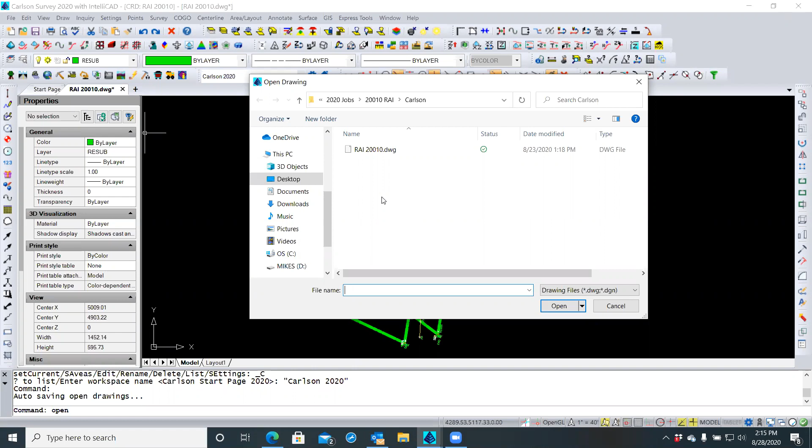Navigate to where that file is, if you recall, or is that what you're saying? You don't remember where it went? Well, I'll tell you what, here's something else to do. Let's cancel that. Let's see if here's another option. If we do file, down here's the recent ones, but you've probably opened more than... oh, there's a temp, is that what it is? That's probably it. Yeah, I think so.

Okay, now what we're going to do is have both of these files open, and see what I'm doing here is clicking at these tabs and switching back and forth. So when we get something done over here that we want to put over here, we can copy it and paste it. Or from the Explorer, maybe we'll have line types that we want to put from this file into the other file. And if you see here, I've got two different files open.

I've got your file here, and there's my drawing template. So let's say if I had... looks like the line types are line type names, and here's the template. All right, so now we've got a few more line types in this template file that you don't have in yours. If we look, at least down from here to here, we're different in the template.

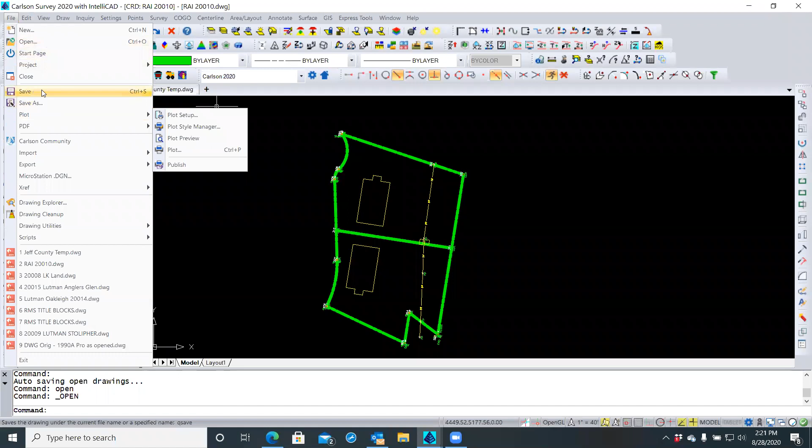Yes, mine does that too. So it's good little insurance.

Okay, so we were here working on this one, if I recall, and there's some layouts, if I look here. Hang on a second, I thought I'd sent you something that we were already putting together notes and stuff on. You did, but that wasn't on this drawing. No, but that's the one I was sort of looking for instead of this Jeff County temp. I can probably find it because I was working with it, practicing. Why don't you see if you can find that and open it? That's the one we're going to start working on as a drawing template. I'm trying to remember now what that was called.

And where would we have put it, is the other thing. Yeah, that's... is that the one we already opened? Yeah.

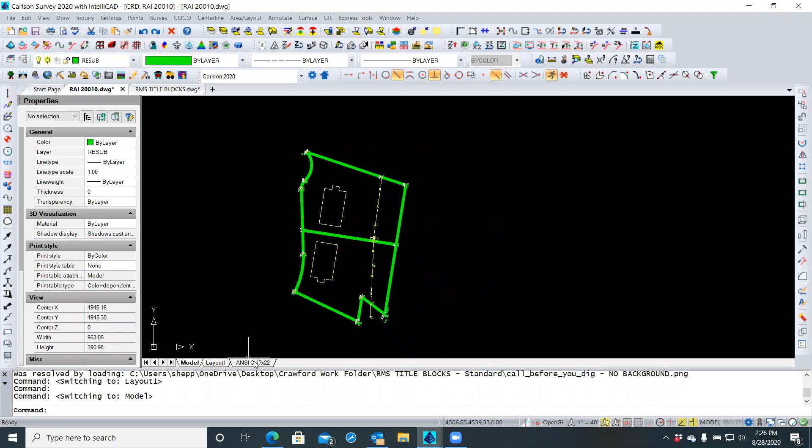Now remember, this is a viewport of a certain scale that looks into our model space, which is here, and does a particular rotation or what have you. So now I'm not sure if this is going to work exactly. I think it will. If I select this guy—because anytime you're in between these different tabs, whether it's model, layout, or ANSI C, or what have you, it's as if you have two different drawing files open, like up to here and back to here.

And there's the CAD command that I'm sure you're familiar with called copy, where when you select something, it asks you to show it a from point and a to point, which means you're making a copy in space right there where you are. So if I said copy, and I'm here, and I said copy this—from the CAD perspective, when I right click and copy, which is one of the ways of doing it, it's going to ask me at the bottom, specify a base point or blah, blah, blah. So I can say, here's what I'm saying: copy from here to here. Okay, so that's what that means.

It's just making a local copy in space of that item, whether it's text or drawing or anything else. But if I want to take it from this layout and put it over in this layout, or vice versa, I need to do a clipboard copy. So as a matter of fact, let's go ahead and start that process.

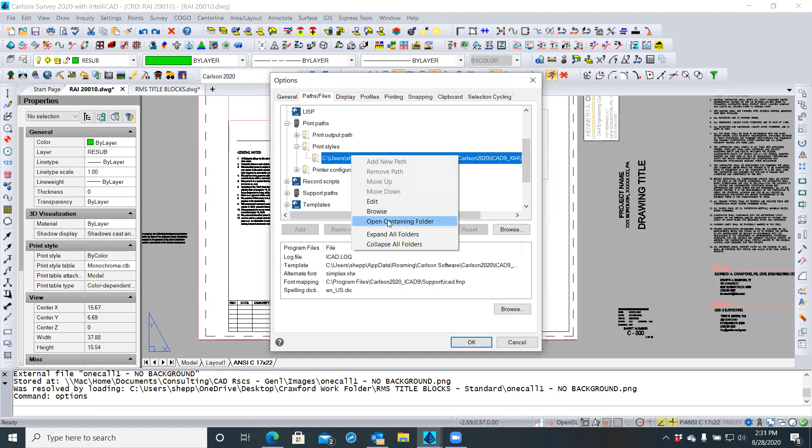Okay, so we've got our Windows File Explorer opened to right where those color tables go. As soon as mine finds it... it's searching, let me just close that. Let's see the form of it. It's going to be my login name under users, under application data. Carlson, until I can... all right, let's see. App data roaming, that's what I'm looking for, okay.

Carlson, 2020, ICAD support, nope, user, nope, let's see support. Carlson. Support. Well, we'll put those in two different places. Sorry Mike, bear with me one more quick second here, I need to run Carlson to figure out where that is on my machine.

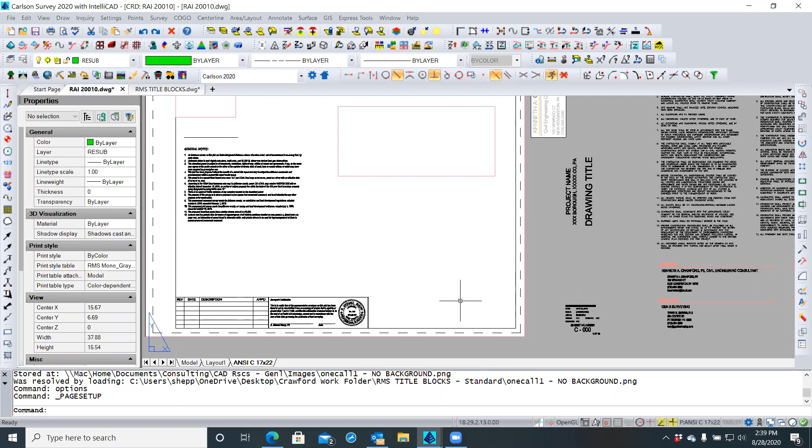There are notes, I see that we've left this guy behind. We generally put him under something like that. And that's the one thing I can't -- even though this is one piece of text, it's one big paragraph of text, when I edit that text, I can't have that line in that text, other than I can have just these letters in that text could be outlined, but it won't outline this other blank space over here. So that's why, and this is pure... it is pure... turn these on, extension, good.

Yeah, you know, it's pure cosmetics and aesthetics, if you will, as to whether to have something like that. But, you know, it just sort of sets it apart and says, hey, here's your notes, blah, blah, blah. All right. Now we have from here, we've got our little location maps.

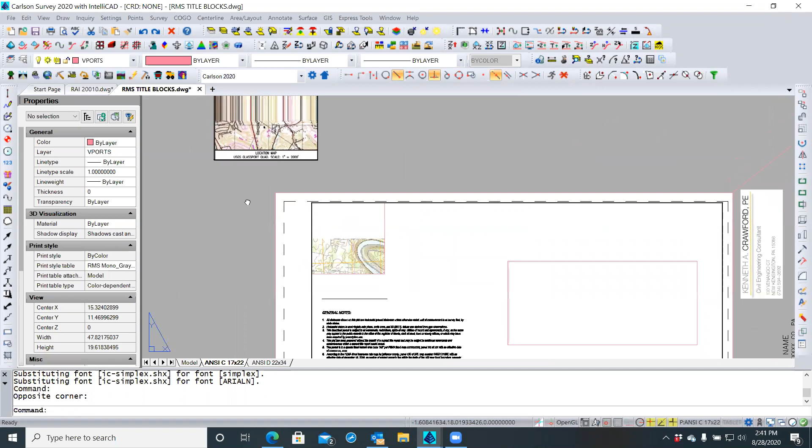I'm not sure, looks like it's in the right place. Yeah, well this is up in New England apparently. Don't know what that one is. It's in Glassport. Okay, so what we were doing was checking out this here, which in our model space... no, yes, okay. That was wherever that is, way down here. That was that mess up there. So this is our probably Jefferson County Quad, it's someplace there anyway. Shepherdstown. All right, okay, it won't -- the subject property won't be in Shepherdstown.

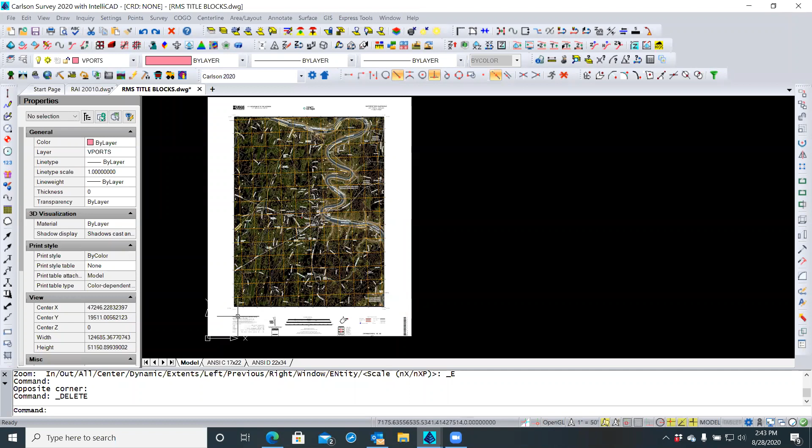All right, so if it's off the edge of the sheet, we don't need to worry about this sheet. So I'm going to take this one out of our file. This is just the template we're working on. I'm going to delete this just to get rid of some of that excess.

Which we'll put over here, showing nothing. So we're going to come back to this.

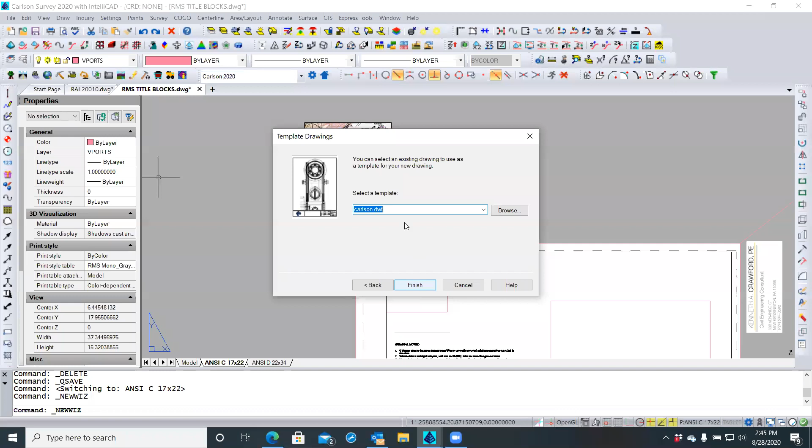What I would like to start to do as well is make yet another file. So I'm going to say a new file, click that icon there. This is a new file in Carlson, correct. Okay, let me cancel this. Yeah, no, that's fine. I'll just make a new file and say a very bare minimum template that I've got, and I'm coming into here to create this file.

And for now, we're going to go back to that Crawford work folder as we're putting this together. I don't see anything, let's come down here. No, it won't be on the Z drive, that's a thumb drive. Oh yeah, okay, if you click on it, it's right there above. There it is, and 2020. Yeah, okay, there it should be there. Where is this? It was on the desktop. Thank you, ah, there it is, your Crawford work folder. Yep.

All right, so while we're creating this drawing, I'm going to call this one our vicinity mapping, and we're going to make just a file that's going to hold the maps we'll use for our vicinity mapping, that we can use from job to job to job. Okay, so I'm going to say save.

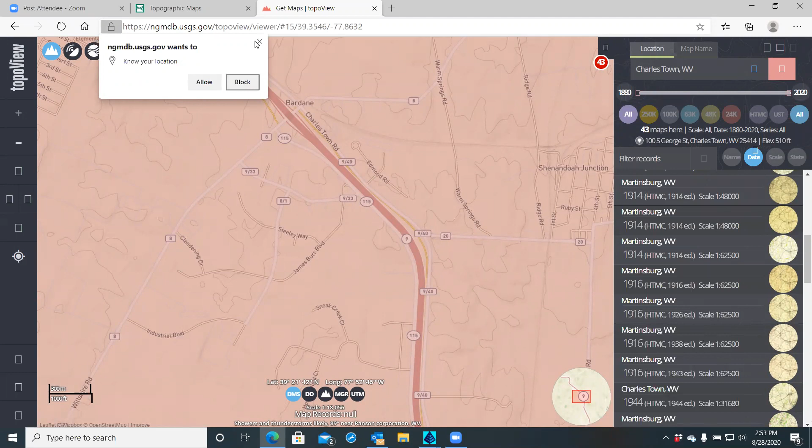Let's see what we put here. I don't need that location. Let's see, back initial extent - right, those are just navigation tools. I don't need that.

All I need is, I want to download it. So about, comment, share - that's where we're looking.

Oh, I see over here all the different historicals - so 1891 Harper's Ferry all the way up through 2019 Charles Town. Yeah, it went back to Harper's Ferry when Harper's Ferry was still in Virginia. That's pretty cool. All right, so there's our Charles Town, West Virginia 2019, so we selected that one.

We save as - these are just web pages, nope.

All right, so what I want is that map. All right, so scroll to, okay, show info, zoom, pan, pin this map, reporting errors, show - oh, here's my choices: JPEG, KMZ, GeoTIFF, or GeoPDF.

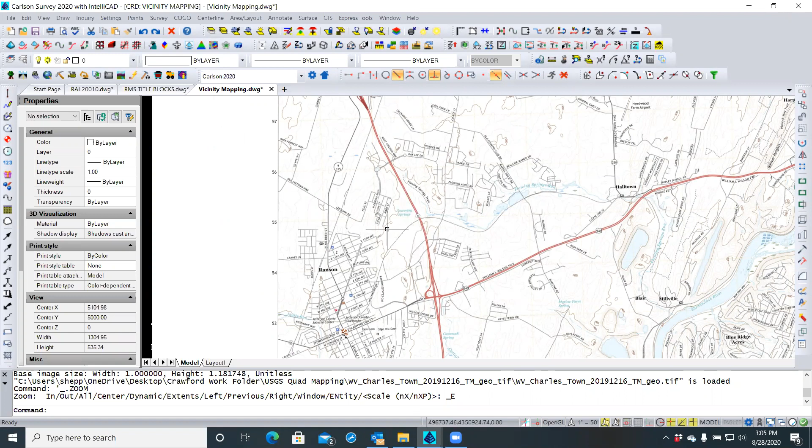Now, none of that is necessary with what we're doing over here, because I think we're still in 5,000 space, are we not? Yeah, so none of that's necessary, but we'll just have to move it around a little bit to make it fit.

I think, let's see, do I have that over there? I still need it. Okay, yeah, to make it fit up here, we'll just reposition it, all right? So let's go to my vicinity mapping. So there is our one file that's in there.

Now we could... I need to find something now because I told it no conversion. Aha, this is in meters. It's in universal transverse Mercator. That's meters, maybe it's in meters. Hold on.

We may have some adjustment to have to do here, Mike. Let me see. Let's check out this distance. If I go from here at 0 to here, that distance should be roughly 10,000, and it's not, it's 3,000. So it thinks it's in meters.

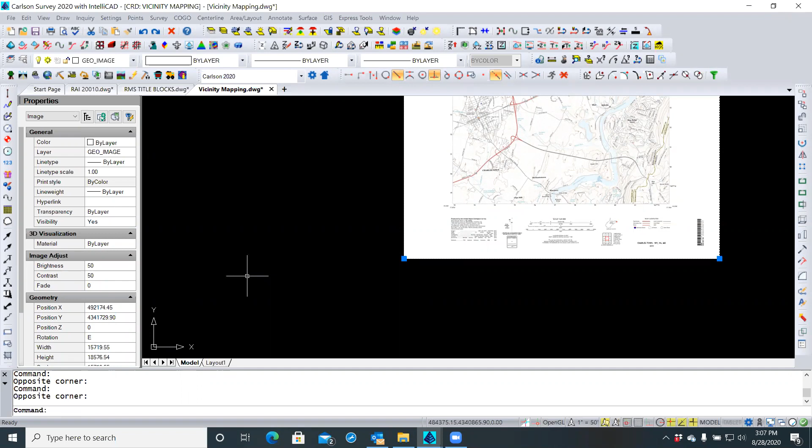Okay, so I'm going to actually select that, delete it, and repeat that process. Place image by world file. I'll select that file again. And now the unit system.

I think it's asking for my originating coordinates and not my destination. We'll see. Let's see what size it comes in as this time. Let's give it something rough. Yep, that's it.

So your state plane coordinates around the Charlestown area should be on the order of, if I'm looking at that coordinate box down below, 1,630,000 as an easting, and 14,260,000 as a northing. Does that make any sense to you? No.

That's what I was afraid of. All right, so it brings it in the right size when I do it that way. So there's our scale. Are these what you would expect to see as state plane coordinates in your area? Yeah, in feet, right? Mm-hmm.

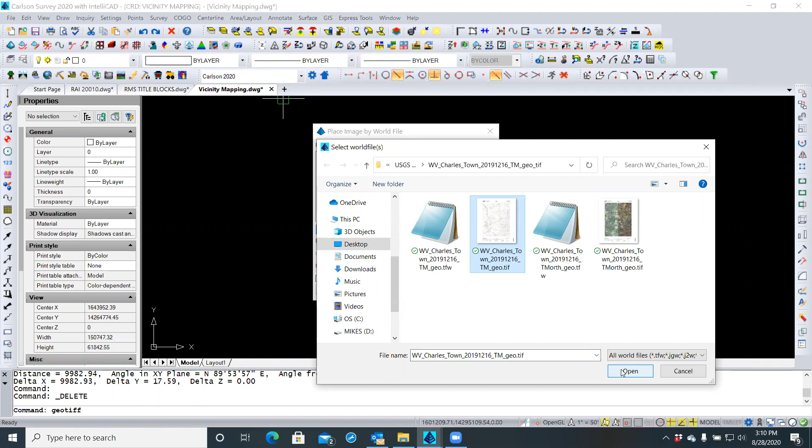Well, I'm not really sure why this isn't going that way. Pause to insert. If I take this file, I think I have to take that file and try that and see.

Set the unit system for the image world file. That should be meters. That screws that up. I think it's the right distance. All right, that gives me the right coordinate range.

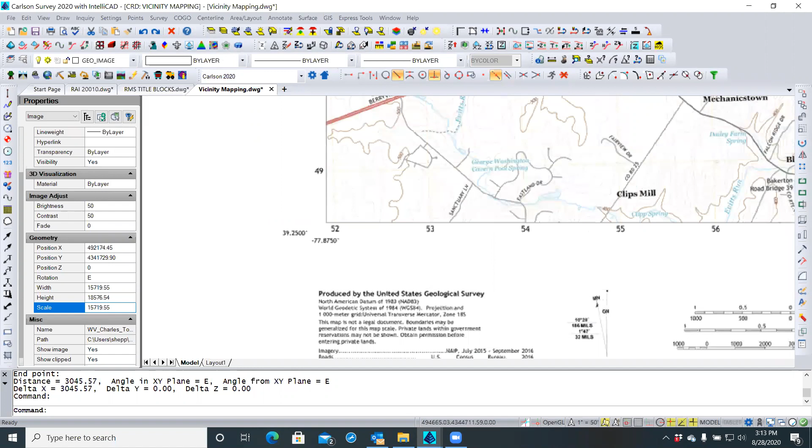So we'll do, anything, 242,000. See, it's very definitely, when I bring this in, I tell it that coordinate of that lower left pixel. But if I say US survey feet or no conversion, if I say US survey feet, it takes this coordinate value as if it were a meter and multiplies it by 3.28 or whatever that number is and puts it way up there.

So it brings the distances incorrect. Now see, if you look at this, if I measure this in meters, if I say give me a distance, I'm going to go from here to, let's go all the way out to here, and you should see that number is going to be close to 2,000. Look down here, see, that's 2,000. I didn't snap on it, I just clicked from here to here. It's 2,000, but that's 2,000 meters.

Okay, I wanted to be able to measure 0 to 10,000 in feet. So if I go from here to here, that should read roughly 10,000, but it doesn't. It reads as if I'm in meters in my drawing.

So my point of confusion here, Michael, is that this process, what we've just told it, should bring that in correctly, but apparently...

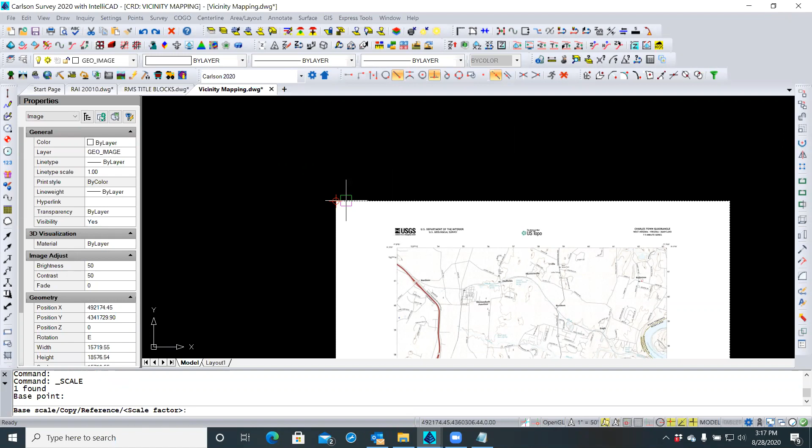So in US survey feet units, I've got 39.37 inches per meter. So that's 39.37, divide that by 12, so that's 3.28083333. That's my scale factor, 3.2808333333, and boom. All right, so now I'm at the right location coordinate-wise.

In fact, are you familiar with a state plane coordinate value roughly in, say, Ranson?

Not off the top of my head. I was just hovering the coordinates, looking around. I'm at like 500,000 easting and 4.3 million northing. Does that sound relatively in the ballpark? Okay, so I'll check one last time on the distance. Pretty confident it's going to be correct. I'll go from here to here, should be close to 10,000. Bing, bing, boom, 99, okay, that's it.

All right, so we're okay here. I'm not going to worry about saving, giving you a process on this thing right now to try to memorize, and we'll start building this, but I'm going to leave this here. I will, however, in the coming days try to figure out or get with tech support and ask them what's going on with that. So I'm going to save this file, called vicinity mapping, and we're going to use that to reference into our drawing.

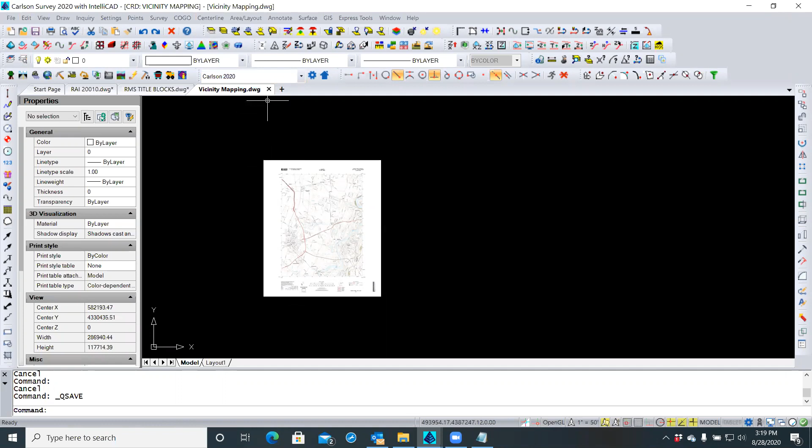So I'm just going to close it for now, and we're going to reference it into this file. Let's see how I want to do this. I could bring it straight into paper space, or bring it into model space. I'm at the title block. I want to be in, well, it won't matter in this file because it's not going to line up with our stuff anyway. So let's go to model space, and I need to X-reference, externally reference, that mapping file so I can show it from my layout.

And what I'm going to do is, when you X-reference anything, it's going to come in on the current layer. Well, right now my layer is called resub, so I don't want to see that show up on this layer. So I'm going to go to my layer manager, my layer control button here on layers. I'm going to make a new one and call it XREF.

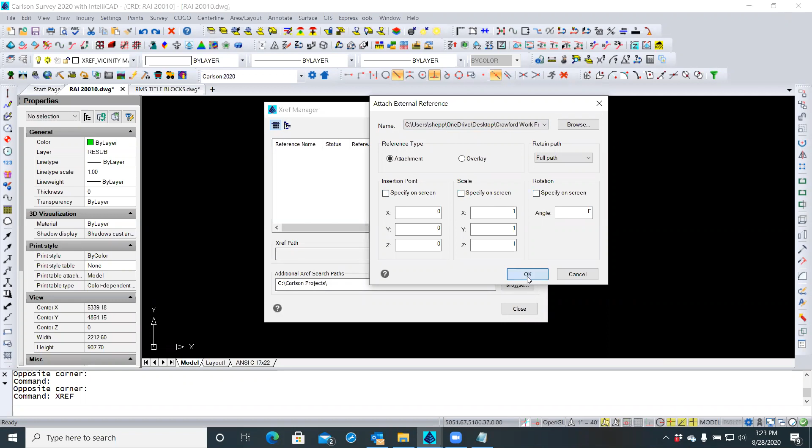Sometimes you have to navigate to it depending on where it's pointing. So it's going to be here, I'm going to say open. Now, when it comes in, it gives me the opportunity to place it at a specific location, give it a different scale and different rotation, but I'm going to uncheck all of those so that it does come in at the proper coordinate location. And I'll say okay. Then it comes back up and lets me do some more stuff with other files. I'm finished, so I'm going to say close. And now I'm going to double click the wheel and do a zoom extent.

So you can see where your work is down here at 5,000, 5,000. We'll come up here, see the coordinate values. There's your 500,000, comma 4.3 million, and there's going to be our area up in here. So this one is truly at a state plane up here, however, down below it's not. That's your 5,000, and that's okay. So we're going to use this though to build that map.

Now I'm going to do this just because I don't like to see this extend control. Let me see, X fade, XREF fade control. It's usually really high, and if I say 0, you should see that, that's fade control.

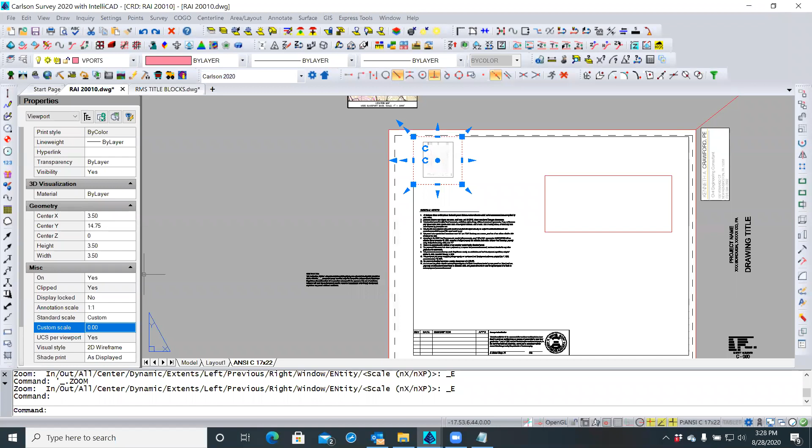Oh shoot, it's 24,000 inverted, so that's going to be 0.0000416666667, 4166667. No, that's not exactly right, is it?

No, it's not. It is—should be 1 to 2... 1 inch equals 2,000 feet. The paper's already in inches, so that should be 2,000 inverted, so that's 0.3 zeros and a 5. So this...

Let's see, am I in paper space? Come on, paper—there we go. All right, so if I'm here, that standard scale now is not going to be available. We'll just use custom, and a 0.3 zeros and a 5.

Come on... regen everything, let's see. Mike, I don't understand what's not getting fixed here. Did that... it's not changing size there at all, is it? Doesn't look like it.

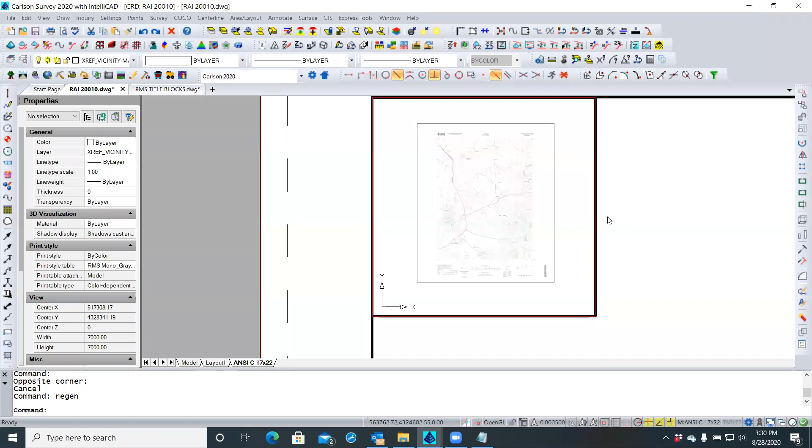I was just wondering if there's a delay on the visuals coming back to me. Guys, do you still see the entire frame inside of this? Yeah, it's kind of blurry, but until you zoom in, it'll straighten itself out.

Oops, that's a little too tight. Ah, it finally regenerated itself at the right scale—maybe, except now I've got to go back and find it. I think what happened was I was inside it. So if I'm here at...

Let's see if I can write this way. All right, so that's at the right scale. That is at quad scale—that's as if you had taken that quadrangle map.

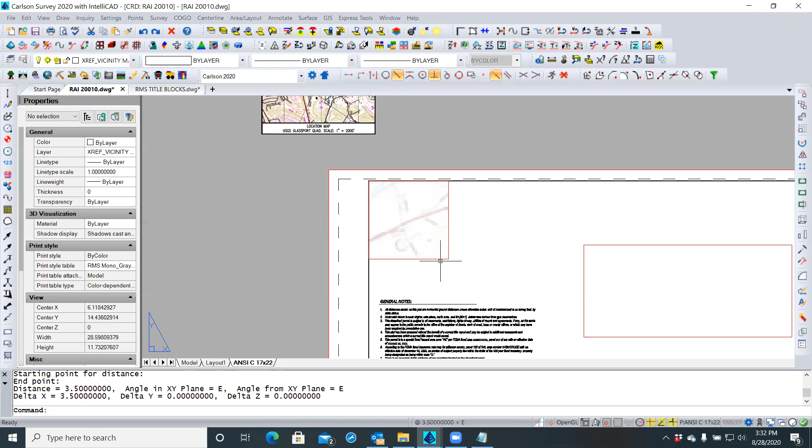Now keep in mind, the thing we're looking into here, this viewport, is only—what is that, distance from here to here—3.5 inches. So it's 3.5 inches square out off of a quad sheet, which is here. So it's only that little 3.5 inch window that we're looking at.

Now we can change that if it needs to be bigger, or what we need to do at this point, if that's sufficiently large—which it should be if you've got enough features shown—we need to now position what we're looking at dead center of our project site. And that's where you're going to have to know where that is.

Yep, so first of all, what I want to do is hit the save button. And there's the regeneration. All right, so now what I want you to do—I'm going to double click inside of it here. So now it's active, but don't roll the wheel, okay?

Okay, that'll change your scale, but we do need to pan. The way you normally pan is you press and hold the wheel, but it's awfully easy to roll the wheel accidentally. So if you type the word pan and hit enter, you can use the left mouse button instead. Use that and get it centered around your job site.

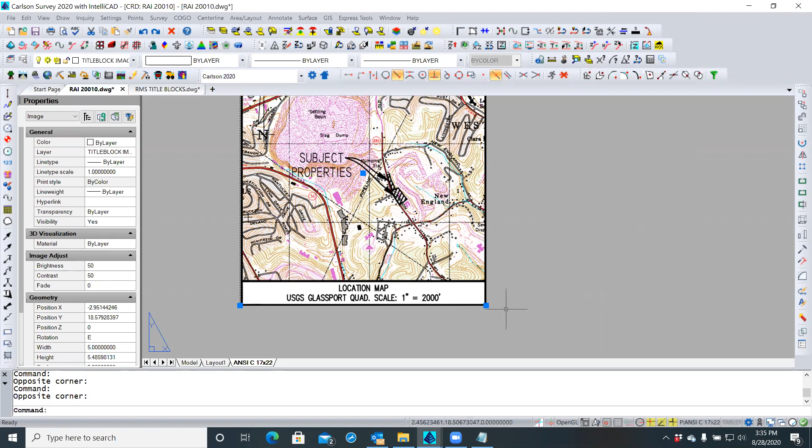What all is that? Is that all? Is that part of the... that whole thing is an image.

So I don't need this anymore, since I did that in a separate software. But I might like to have some kind of a little title, a little caption, something that says it's a vicinity map or a location map. So let's do that here.

We're going to find out what layer this is on. It's on title block notes. I'm going to make that my current layer, select it, and come to this secret little button right there. This is MOLC, which means make objects layer current. So when I click that, you see I've changed to title block notes.

And I'm going to put the little title, scale reference, and maybe a little north arrow onto our location map. So now what do we want to call this? What do you guys typically call them? Vicinity map, area map, location map? Vicinity map. All right, so we'll call it that.

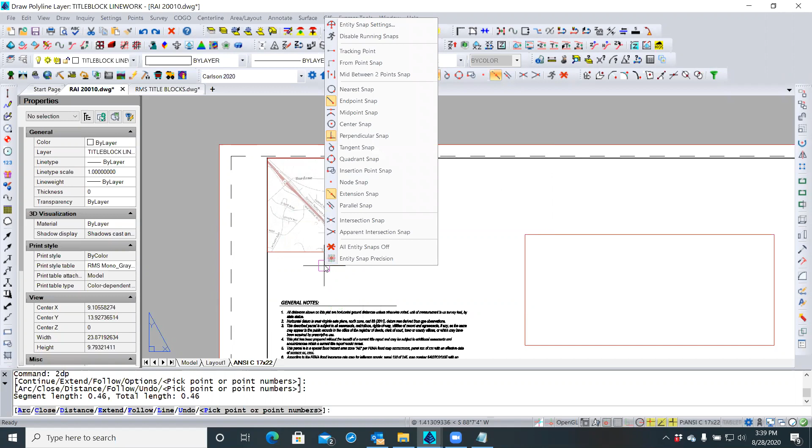I don't need to be much more than that. And then I'm going to draw over here, and I'm going to snap perpendicularly to that. And so that gives me a little area to put some captions.

All right, so I'm going to zoom in. Now you're going to switch your current layer from title block line work to title block notes so that we can put the titles on here. There you go.

And you're going to type this: vicinity map, maybe the name of the quad if that's what you want, or you may not need to do that, and just call it vicinity map, or give it a scale. Is that where I go? The type? Yep.

And survey text? No, not really - that has to do with measurements of the ground. So in fact, the annotate menu itself is maybe not the best one here, because we're really just going to put some text down. Annotation in this sense means to annotate the geometry in the model, like the distances and bearings they've drawn. So we're really just labeling. So we're going to go to our draw menu instead - so I misled you.

I apologize. There you go. Yes, and we're going to just do a standard text would be fine. Any number of those things.

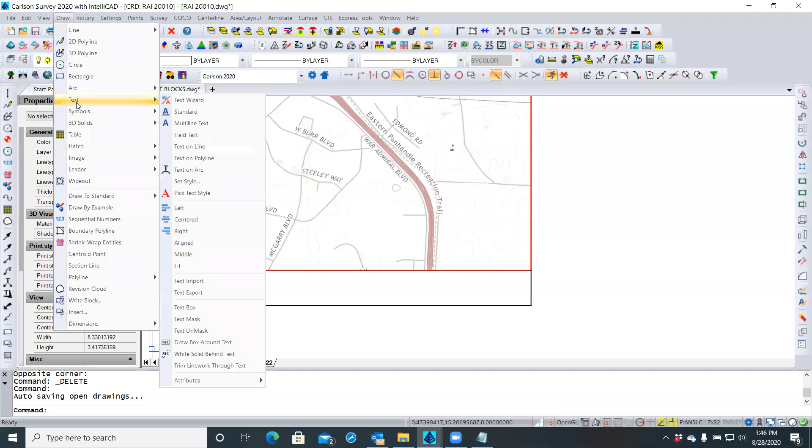We'll go ahead and do this, just to show you how that's done. So if you want to center that and you want them one line above the other, then if you go to draw text, just like you did before, just standard text. Now you're going to click a point or justify or style. So the first thing let's do is J for justify.

And the justification we want, here's your different options. Left is what we just had. Center would be what you think we're going to use, which could work. But notice those ones with the 2-letter codes: TL, TC, TR means top left, top center, top right, middle left, middle center, middle right, or bottom left, bottom center, bottom right.

So if we type MC, that means the middle of the text and the center of the text, that's its insertion point. I'll show you what we're going to do with that in just a second. All right, so we now have that, and it wants you to know where do you want that to be.

Well, now remember, right now your entity snapping is off, but we are going to put that somewhere, and if you have something you want to line it up with, you can snap to that point automatically, and we're going to do that right now. And if you see up here...

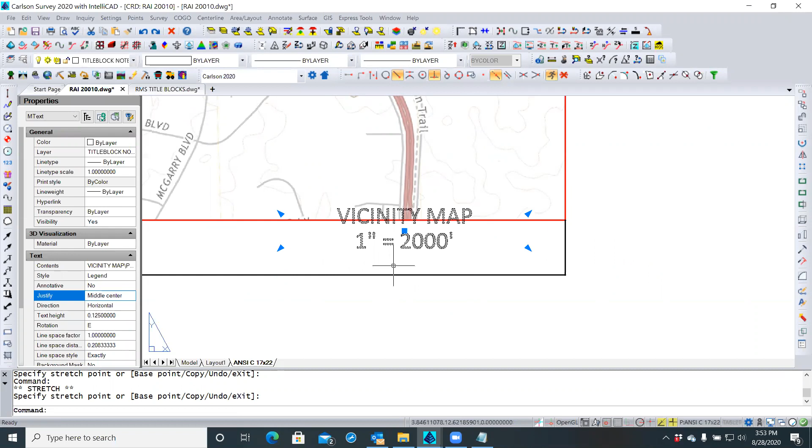So now I need to move this text. It's selected now, and I'm going to right click and choose move. It wants to know from and then to. Well, the from point is my insertion point of this text, which is now the middle center. So I'll shift click.

Insertion point, and I'll grab that piece right there, the insertion point of that text. So that's now where I'm going to line up. And you remember the one we did a minute ago? Hint, hint, this guy right here.

Yeah, so we'll go middle of the 2 points, and the 2 points I want to go in the middle of are shift click mid, which is right there, and shift click mid of this one. And if I look at that insertion point, it is right between these two guys.

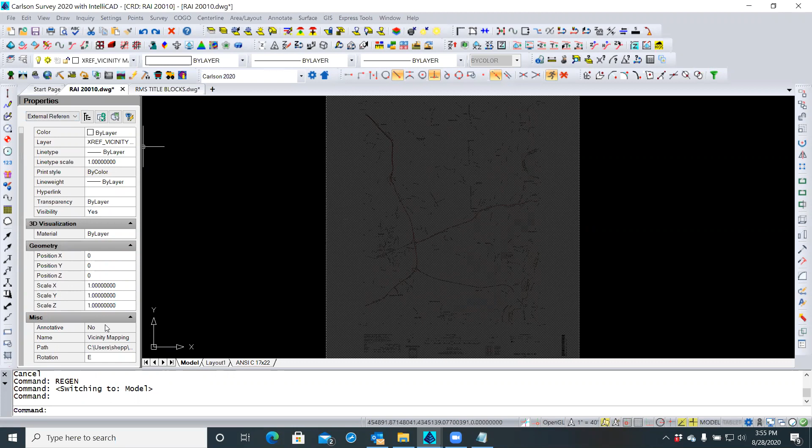So that's the essence of getting that done, and you can use that same file. Remember, the file that I have in here is an XREF, an external reference, and down here it tells me the name of it. If I scroll down, it's called vicinity mapping, and it lives there in that folder I've got.

So that can always be done. And usually, if you're working in state plane coordinates and you bring that file in, it's going to line up right underneath where you're working. Okay, but this will work for what we're doing.

Keep in mind, though, if you ever do a zoom extents while you're in model space, it's going to try to figure out that the extents includes where that mapping file is, which is way off up there in different coordinate space. So one of the things I like to do in that regard is this is my sort of working extents, if you will.

And I'm going to type, or you're going to type, the command view, V-I-E-W, and hit enter, and you're going to save this. The way you save it is you're going to click the new button right there below, and up here in the name box at the top.

Over to the right where it says name, highlight that and just call that, you know, main site or whatever you want to call it, or project area, just anything you want to call it. And you'll type site location. That's fine. Now say OK.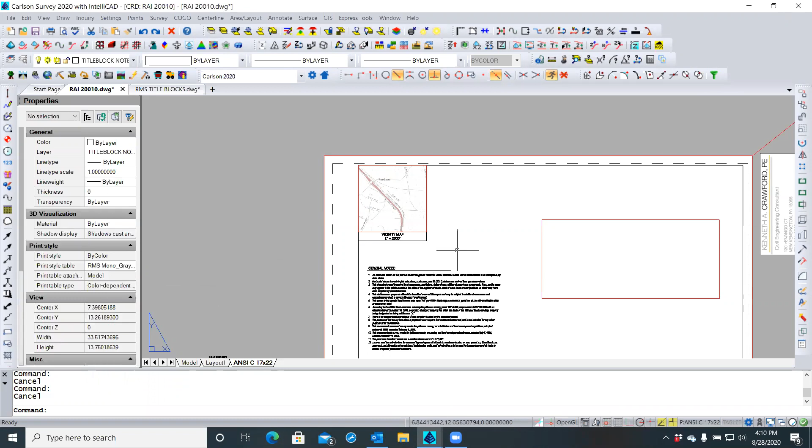All right, so now, first thing we're going to do, we'll worry about these notes here in a little bit. I'm going to drag them out of the way for a minute. We'll select both the notes and that line. I just did a crossing window to drag across it. Now I'm going to press and hold the mouse on either one of those and just drag it off to the side here a little bit. That's a shortcut way of doing a move.

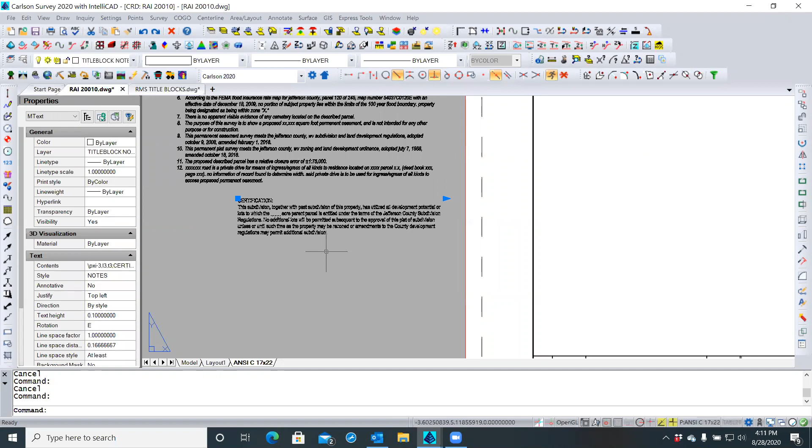And we don't need this certification. I think we already worked on this last time. This certified the monumentation showing this plat. Well, actually, that certification is a different certification. We don't need that one for this, but we'll need it for some others. We still have it over here in the one that we're working on. That's here, we're going to always have it there. So for right now, we're going to be getting this guy ready, so I'm going to select him and delete. All right, so we have that.

So we need to get our drawing in at the scale we want, and then we'll arrange all this other stuff around it. If we go back to our model space, that's what we want. We started looking at, here's layout 1. This was that layout, we sized it, we rotated our view. We did not rotate the stuff in it, we just did the view, if you remember. One thing we're going to have to do is show the other side of that road right of way in front. That's no problem, we can either make the viewport slightly bigger, or we can reposition this. Any of those things is fine, and we'll come to that in a second.

So the last thing we did last week was, on the view menu, we did this twist screen, and we lined up with that line across the front to be horizontal on our sheet of paper. Okay, and now what happens if I double click inside it, you see that little icon there? So north is sort of that way. Right, and that's going to be what we use in just a minute. So I'm going to double click back out of it. If I select that viewport, I see it's on layer 0. I'll put it on layer V-ports so that it doesn't plot the frame.

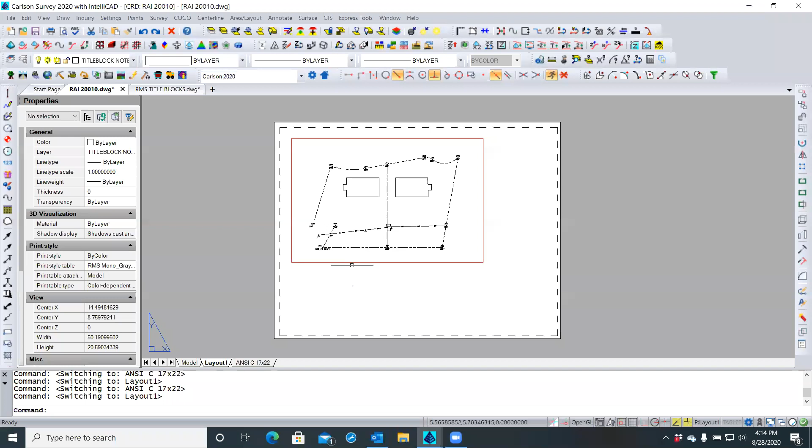Okay, now to bring the viewport from here to here, we're going to do a copy, but because we're changing these tabs, it's just like we're working in two different drawings. We need to copy this through the clipboard, because remember, the copy in a CAD sense means to give it a starting point and an ending point. We're just making it a local.

So we're going to select the viewport. We don't have to select anything in it because remember, it's just the frame, the hole we cut into the model. That's what we want to copy.

And I'm going to let you drive here. So you're going to right click, and you see, clipboard, and you're going to copy with a base point.

Go ahead. And now I would pick, it doesn't matter where, maybe that upper left corner. So, yeah, that's fine. And all right, so it's now copied.

You can press escape to deselect it. You don't even have to. You could leave it selected. Now I would get in the habit...

We're done working with our... shoot, what happened here? Well, I don't know. Put that back to full size screen. Something I double clicked it.

I like to put my snaps back on, and back when we were working with the text, we turned them off. But this way, if I need the snaps, they're on. That'll come through practice and habit.

Now, so you've copied this, and your reference point is that upper left corner. So now let's go to our drawing sheet, which was that one, and let's right click and choose clipboard.

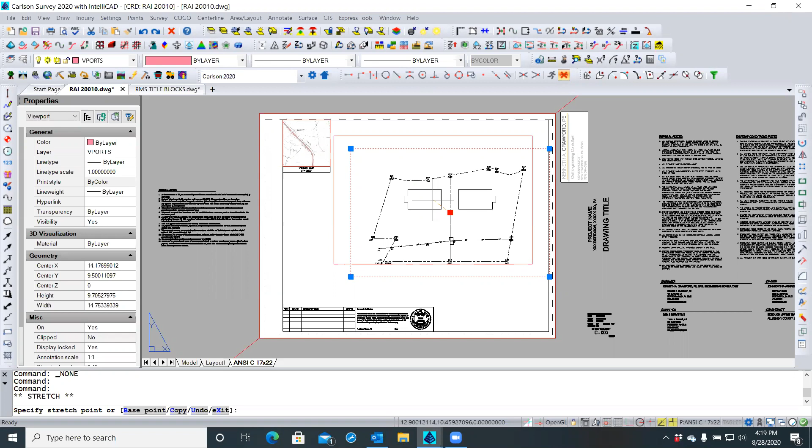Now get in the habit of seeing that the edge of that viewport is getting close to the edge of the vicinity map viewport. Get in the habit of understanding that it doesn't matter if they cross. What you want to do is go ahead and click to let it go.

Now, what you want to get in the habit of looking at, Mike, is getting a sense of where this line is going to be in relation to things, because this stuff is just defining the limits of it. We're going to be worried about where the actual line work goes, so you don't have to move this by this point. That just gives you a point of reference.

You could highlight it, right click, move. And this time, instead of it being in the middle of there, we want to take it from, say, right off that corner, and put it right there. Okay, so you see how they overlap, and none of that matters.

In fact, these viewports can have—now not this particular one, this is a rectangular viewport—but you can draw irregularly shaped things. Let's say I drew something that looked like this, and I could turn that into a viewport. So that would then be a viewport instead of this red one. But right now, rectangles are fine.

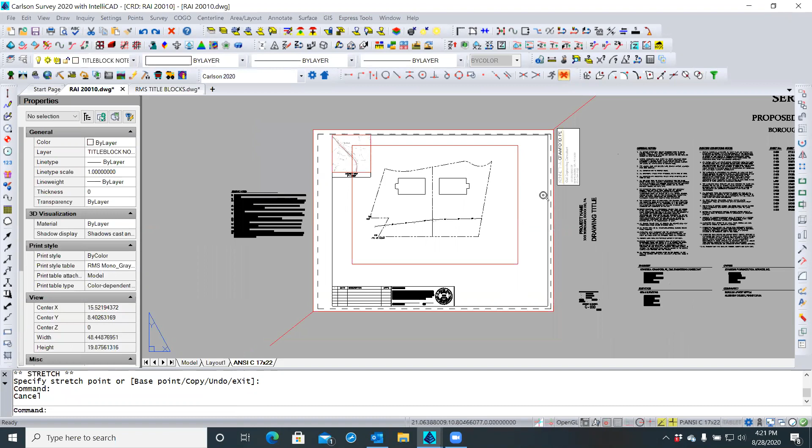Yeah, I'm wondering if we're going to have room for all of those notes. Well, we may not. Keep in mind, all of these notes would barely fit on the sheet to begin with, but these are construction type notes, so they may not apply. So as we're working on this, you need to figure out what you need in your general notes.

There are things here like horizontal datum is West Virginia. I don't know, this came out of something, but it obviously needs some edits. And it should be state plane, not state—it's a state plane. But I don't want to...

I don't want to spend a bunch of our time together here to do this stuff. This stuff you can figure out. So read through your notes and figure out what you want.

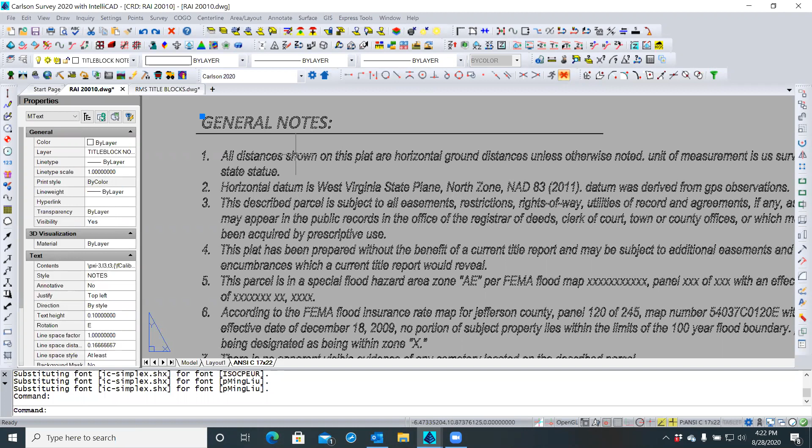Now, this style—you may not want it to be italic, so maybe this style would be... let's see if I start here and go to the end. I'm going to change that. There's no style. Say okay, except no, that's probably... well, that's what I want to do. Yeah, there we go. And I need to come up here and just select that title and make just that part of it italic, and say okay.

Go through your notes when you get a chance, figure out what you want, even if you just type it up as part of a word processing document. Figure out what needs to go on there, and if we're not going to use it, we don't worry about it, we're not going to care. If this is our single sheet, we may or may not even need a legend.

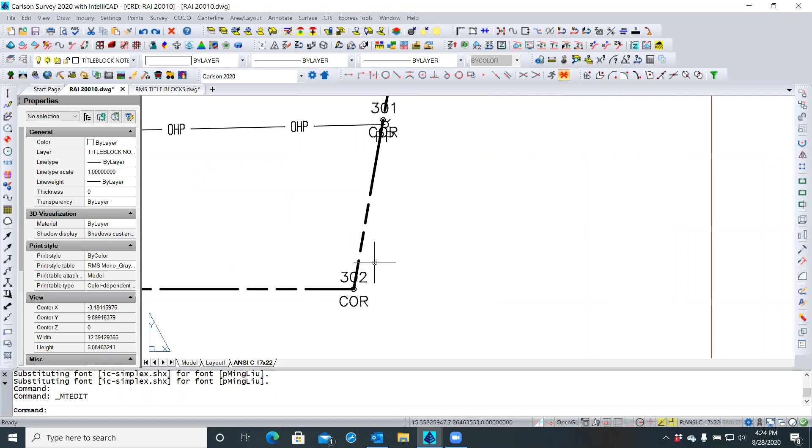The only reason we would need one is if on multiple pages we have different things, but if every time we use a symbol, or the first time we use a symbol, we then give it an explanation, and say a call out or whatever.

Oh, and by the way, too, I don't know your preference—if you like to see these things look like that. I'm going to zoom in here a second. Let me see if I can fix that. So I'm at that point. I'm going to go to the symbol, and instead of this, that's SPT2.

I don't know that they give you these. You may need to download them. Let me see.

SPT2. Look up here for a second. Points with wipeout, yeah okay. So that's points, right? If we choose points with wipeout, then that SPT2, I don't see a 2, I see a 4. That'll be fine, it'll be slightly larger. So I'll take that one and say okay.

And now I'll click back to paper space. Click that back on. Oops. Endpoint, center, extension. All right.

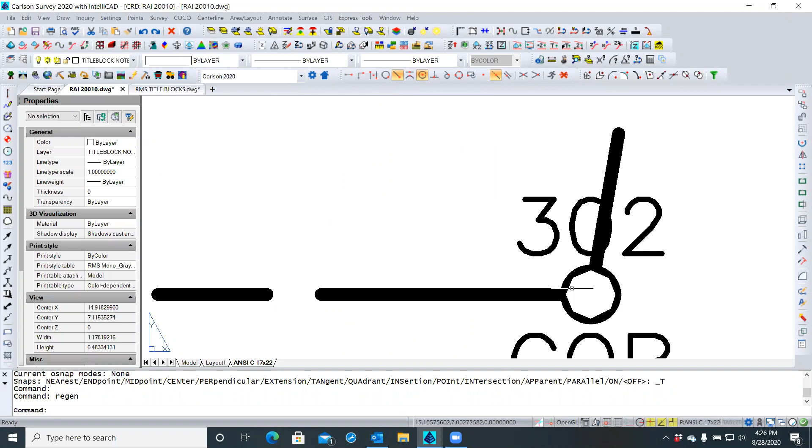So now you see the difference there. Yeah, it's sort of obvious, and it looks like I've trimmed this line up against that edge. Now, yeah, it looks much better. No, I don't think it's going to look like a stop sign inside of there. It's going to be, when it prints, it'll look like a circle. Right.

So consider doing that, and when you find that on those points, I change that one. It's that symbol, instead of points, it's points wipeout. Now they've got SPT4W, and I don't see, that's what I was looking for. Yeah, that's just a few of them that they have. They don't have the whole points library done over again. Okay, so, oops, what the heck, I thought I was doing it, set points wipeout 4W.

Now, what that is and why it's called that is that when you break this symbol apart and figure out what it is, that circle just like this is, but it also has included with it what's called a wipeout. And a wipeout is where you draw a frame, you draw a shape of something, and if you say wipeout with it, then what it does is it fills that shape you've drawn with the color that's the same as the background, either the background of the screen over here, which is black, or the background of the paper in this situation.

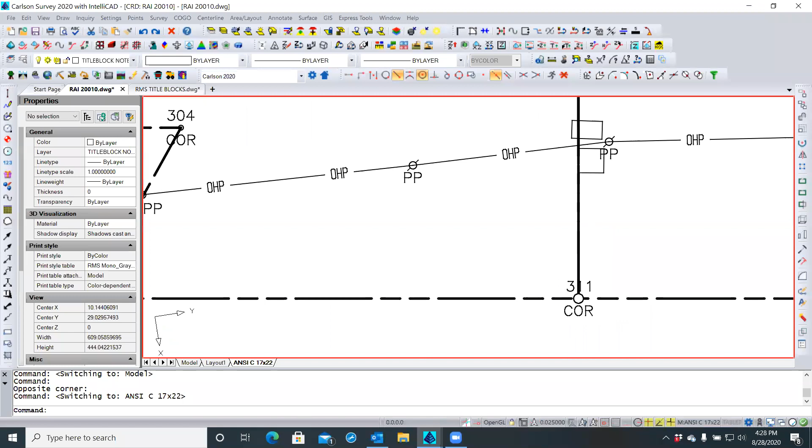Okay, so it just basically blocks out, it wipes out everything except, and it is something that you can select and get rid of, or select and put above or below certain other things in the drawing. Okay, just like send to back, bring to front. So it's really a nice little thing. And I think this, for instance, this power pole,

now go to my wipeouts here, and there is maybe, yeah, there it is. Okay, so you can see the difference. You see how it looks like the line just, yeah. So that's something, but the nice thing about that is that you're not having to trim the lines here.

So when I select this, it still goes to that corner. It comes out of the corner, so I can still compute. It's still a closed polyline, all of that. It's just that it sits below that wipeout. And if for whatever reason, sometime you're ever working with these things and it starts to look like

that, you say, oh, what happened? I fixed it. Well, what's happened is that, that is still there, it just sits underneath this one. So this one needs to go back to be underneath that wipeout, okay? So just understand that's sort of a vertical hierarchy there.

All right, so I'm going to let you fix all those. Click outside of that, and you say we need to... it's running through Zoom, it's dropping some video here and there. It just did a regen, brought it back.

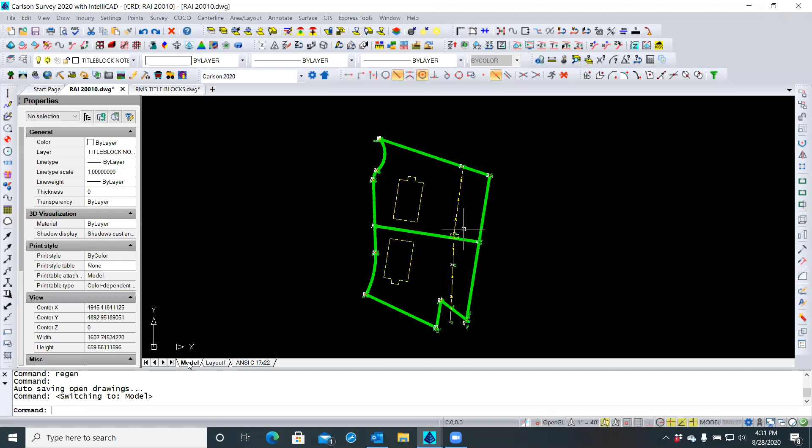Now, obviously, you're drawing it in inches instead of feet, but what you need to do is you would be over here, and you would draw it here. Right. And in fact, what I would do, is that a constant right-of-way width? Yeah, 60 feet. But now, and then obviously this is different, I guess it'll be 30 feet to the center of that cul-de-sac bulb.

So you could draw the line, you could offset it 60 feet, although that's going to put this thing over here shaped exactly the same way as that, but 60 feet away. That's why I was asking about this business. So 60 feet is from here, 30 feet to the center line, 30 feet to the center.

But I don't know what's the radius on that cul-de-sac, it's 60 feet. By the right of way or by pavement, or right of way is how many feet? 65? 60? Okay, so the radius is the same as the right of way width back here, so that's fine. And this radius is 30. And if we don't know, obviously we're going to learn that under inquiry.

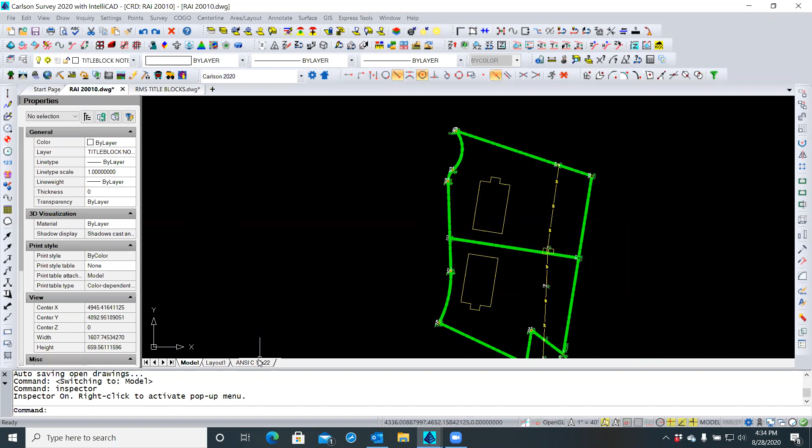Right, but remember, this is coming after the closure of our deed. Right, okay. So you would then know how to reflect or continue this circle on around, and we would mirror this guy, and this side over here is 60 feet away. So you could draw all that, and then when you come back in here, to get this to show up, you have to make sure that this is big enough to let that stuff show through.

Okay, otherwise, as you may have noticed, like if this is here, you know, that clips. Right. So this is an absolute kind of, if I want to tighten it up a little bit here, this is an absolute type of frame. It's an actual clipping of those elements that we want.

So now let me turn this off momentarily, and I'm going to scooch that up, like so. And now what you might want to consider doing is just put the name of the road up here, parentheses, 60 foot right of way, and be done with it. Yeah, okay. I'll leave that to you.

And then, just like we did up here, let's take a look at this. The only way we can really tell what this is going to look like plot-wise—and this is because it's in IntelliCAD, the print preview doesn't work in IntelliCAD yet, they don't have it finished being implemented.

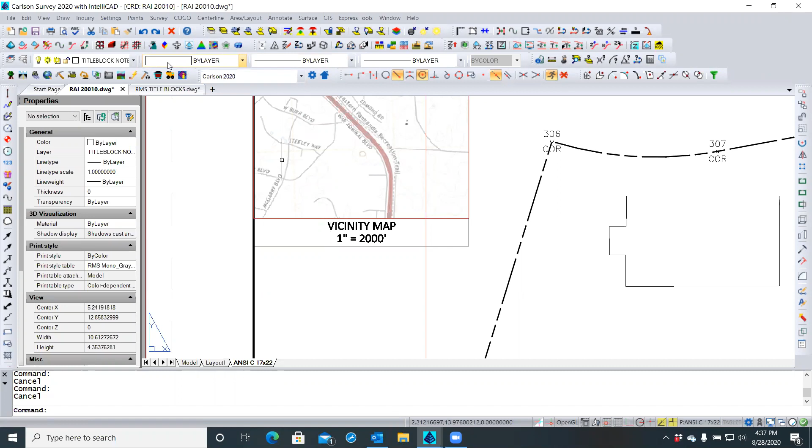By going here, and that's called title block notes. Ah, see right there, see in the print column? Yeah, I don't know why it's set to not plot. I must have been showing it at one point to somebody and forgot to turn it back. So now I'll turn it back on.

All right, and then the next time we plot it, we check it, it'll show up. So we'll say the same thing there—we're on the desktop. We'll just select the same file, overwrite.

Put that down, double click there. Now everything is like you're expecting to see it. That's what I would do - I just keep plotting little things and looking at it, making sure it all looks good. I'll zoom to take the whole sheet into account, make sure my margins look even, that kind of stuff. And I say, oh, I can scoot this a little higher up here, maybe a little in there.

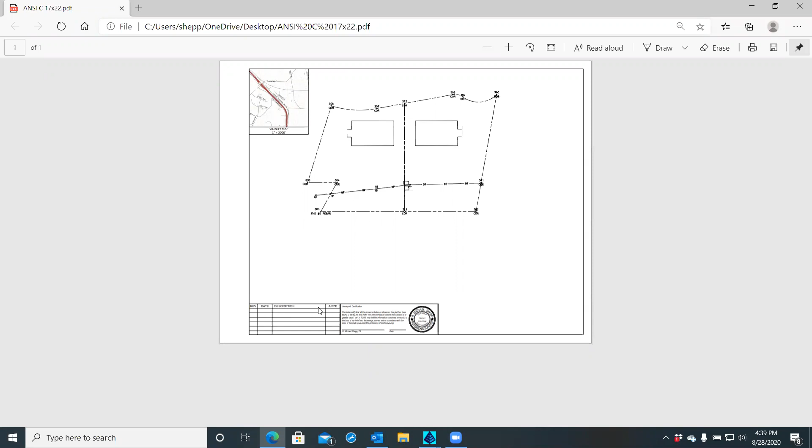So use that as you need to double check, because you get a certain amount of that sense from this, but there's also a lot of these little red boundaries and stuff that it might interfere with your perception of what's going on here.

All right, so figure out the notes you need, position them where you want them to go. Let's say we've got these notes, and they can go - I'm going to put them starting right here, for instance, maybe right in here, okay? So let me turn this guy off - I'll right-click, turn off my drawing inspector. Now, so I've got them here.

They're obviously sticking off the edge, but you're familiar with multi-text, multi-line text. You can select that and bring this in to change the size and shape of all that. Yeah, no, I'm not familiar with that.

Okay, so this is the difference between multi-line text and just regular text: multi-line text behaves as a single object. So if you select it and come over here and change the text height or the style, it changes the whole thing to be that.

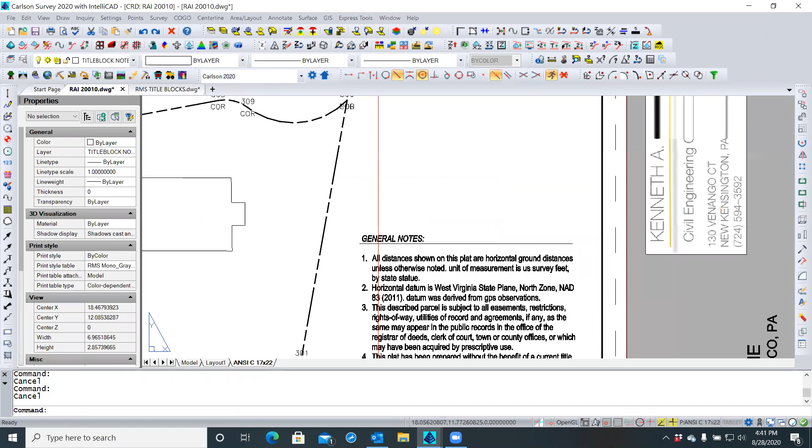Okay, so all of those different things - and if you're going to move that up, I will tell you right now, you're going to forget to grab this guy sometimes. I do it - you're just going to grab the text and go to move it, and you're going to say, oh crap, what's going on? So just keep your eye on it. And there's nothing wrong with having to reposition it later.

Can you show me how to make a title block? Yeah, the title block, meaning your name and address and all that? Sure. Now we also have this information that you're going to need at some point, perhaps, just whatever you want to show, and maybe that all goes into that title block stuff together.

So really, all in the world that stuff is just a bunch of text. Now, what we're going to be shooting for later is instead of those being words of text, we're going to make them fields. And as part of the field, we can store things like - let me change this to...

See where it says project name here. I'm going to double click that and it's highlighted. I'm going to right click and say I'm going to insert a field. And these are all these little placeholders that have different values for it. There are some things like subject, title, author, comments - these are all document categories.

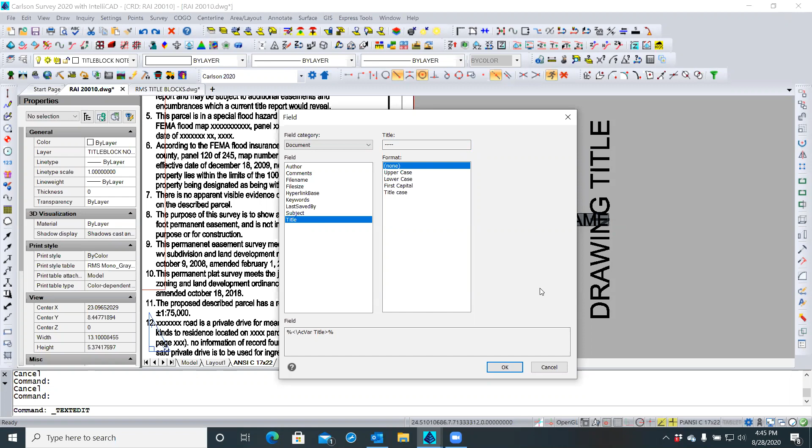So now what we're going to do is put in a placeholder for that. Now I'll click back off. Right now it just says project name. Again, we're not going to worry about this today, I just wanted you to see this. When you are working on a file, we're going to have these as little placeholders, but in our file menu under drawing utilities, we're going to choose drawing properties.

And these are 4 tabs at the top. Here's my general stuff like the date it was created, the size, the location, summary. I can type a title. Now this tends to be what we're doing here now, it refers to this file, which is RAI20010.dwg. So I can give it comments, keywords, type my name as author, give it a subject, give it a title, which is separate from the file name.

Okay, so this title might be the Charles Town Industrial Park or whatever we want to call it. But what we're going to do mostly out of all of these tabs is hit this custom button, and we're going to just add what we need.

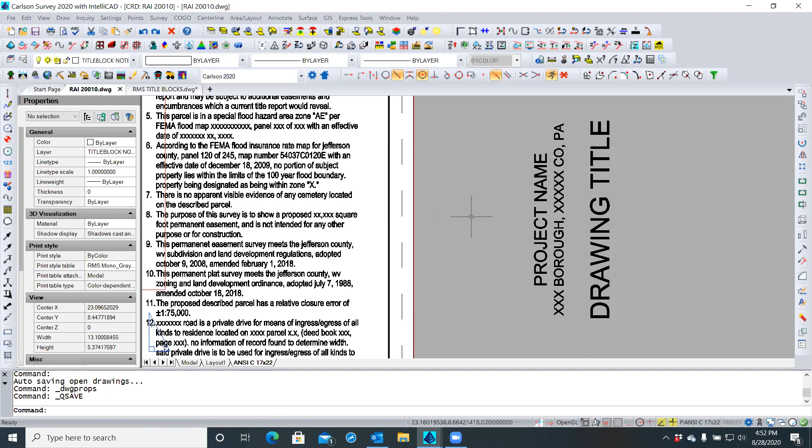Now let's start to build your text. Since you've already got something already done, let's take that. I'm gonna have to go through these notes and completely revise them. Oh yes, absolutely. But I don't want to waste our time spending on this to do it.

But go through and read these notes - a lot of them I don't think are capitalized, so you have to fix that. You have to change things that don't apply. Also, do you ever need to put down this kind of information? Look at all those. Here's your, what do you guys have, Miss Utility? Yeah, we have call before you dig. For a survey plat, I don't think I need to put that stuff. No, that's right, this is all sort of construction based.

Now let's take this. I'm going to select it - there's 3 pieces of text, and I'm just going to use them because they're already sized and sort of ready to go. I'm going to right click, move, and get up here and give it some generalized eyeballing. I'm going to move it down in here, and now rotate those as well.

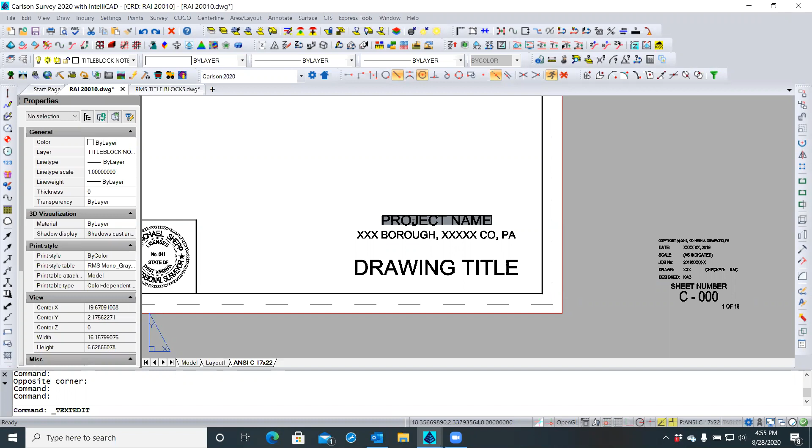Okay, and the field we want - remember we were working on document categories. So that field category document up there, that was, we pulled that down. What else do we have? We've got document, we should have - choose all for right now. There's something I'm missing. Yeah, okay, we have to switch it to all here.

And there you see, there's one that you typed in called county. See it? So we're gonna look for the project name. So PROJ name. There it is. So we want the project name.

There that is. And you can see the format you can choose - you can have uppercase, lowercase, first capital, title case, or since we typed it in uppercase, it didn't matter, but that's fine, we use uppercase, say okay. And there it is. Now we obviously need to reposition that, or not reposition it, but we still - here's what I don't understand, why that, I think that's just the name of it, but what?

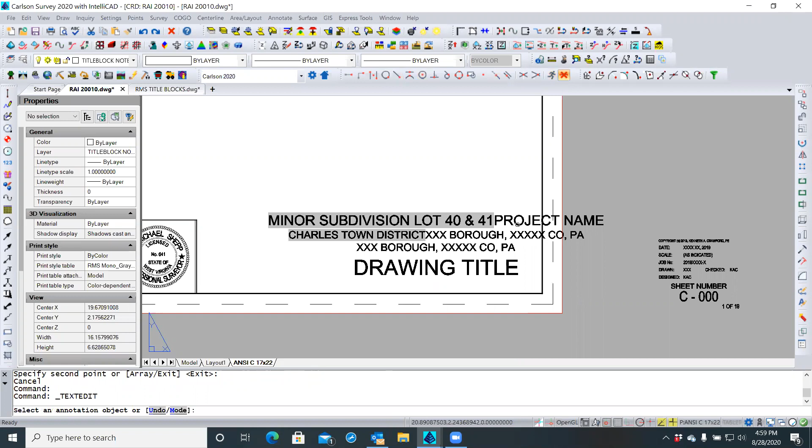Okay, and just want to see, this is, oh, I know what it's doing. It's not doing the name. It actually left this as extra text.

When we said insert a field, it didn't replace it because it wasn't highlighted when we did the insert field. I'm so sorry, that's my

lack of familiarity with that editor. All right, so I'm going to take this now and reposition. Now, when we do it, so now double click your third line.

All right, and now take your mouse and drag across all of those letters in that third line.

Let's see, one more. I think you let up on the mouse, so you have to go back and try it again. There you go, now let the mouse up.

Now right click the mouse and choose insert field. And you want to insert, what's next? County?

It was up the top, but it's alphabetical. Okay.

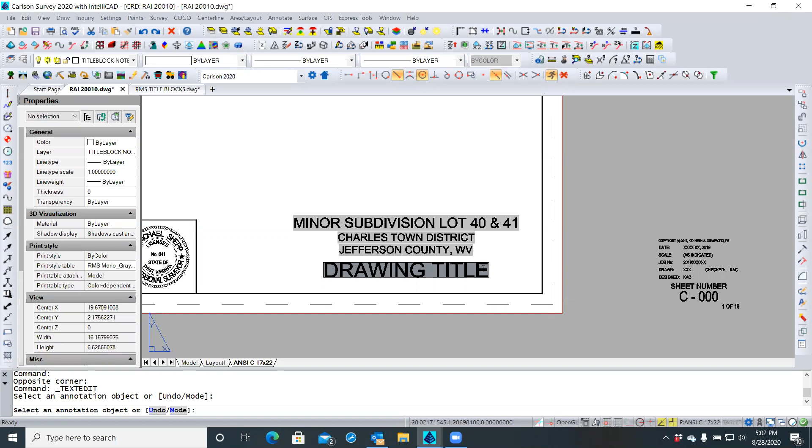Okay, and now finally we'll select this text. Actually, I think it should go above this because it's final plat. Okay, yeah, okay, and that's what we'll do. We'll just position it. Again, we're just taking stuff. We had it there, we had it sized.

So I selected, I highlight, delete. I insert, and that was, we called it a sheet title.

So there it is. But now, and I'll finish the command, I have to, because it keeps trying to make me edit. So I'll now select this and then just bring it up to like so, okay?

Okay, and then now everything that you want. Now, remember, you can also make that whole thing a single block of text, which is called multi-line text, but that can get a little hard to control.

We're missing between, underneath of the subdivision of lot 40 and 41 should be Burr Industrial Park. Oh, okay, yeah, where that was. Well, we didn't have it yet, and here's a great way to show that.

So I'm going to select these two lines right here, and I'm going to, oops, sorry, not that, not by the point, but I'll go over here, and I'm just going to move them down a little bit, okay?

And I'm going to take this line, and I'm going to say copy, and I'm going to go from here to here, okay?

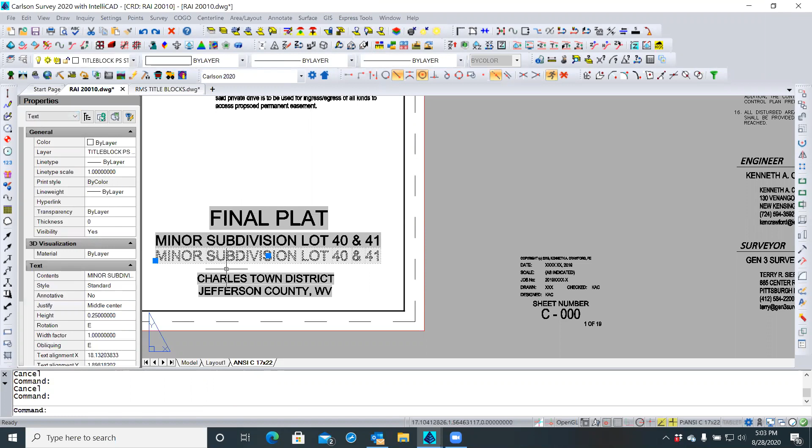So now double click that, select all that text, hit the delete key. Now right click, insert field.

And that was that project name 2. I'm trying to remember what we called it. I just saw it, it was project name 2.

Okay, there you go. Now, just to show you what you can do, once we're finished with that, you can add the company name and all that stuff wherever you would like to see it. Remember all those samples we had, like Appalachian had theirs with the little logo? It can be like that, or it can be just drawn off in a little block off to the side. Any way we want to do that is fine.

And again, I have a little graphic of mine. I can't get that to sit down. See, I've got a little graphic of mine. That's really all that is, a scan of my business card.

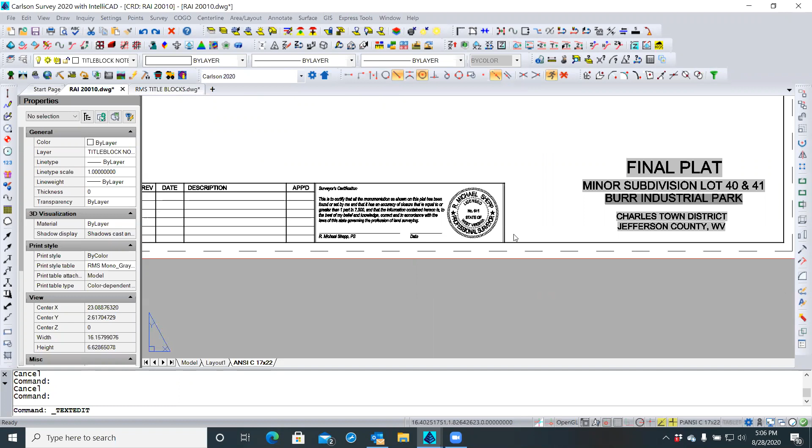Again, that's why I'm not hugely in favor of these smallish sheets, especially if I need this many lines for an approval block or a submittal block. That may be overkill for what I'm doing, so I may make this smaller. I don't think we can get this much smaller than it needs to be. That's the size of your seal, and that's your attestation. But we could do something here with this.

I want to change that surveyor certificate. I can just go in and double click that and change it. Yes, it's just text, right? So the same thing is this. These are all pieces of text. We just move them around.

Now, thinking long term toward when we're working on the template, we could have a field that says surveyor of record, but it's going to always be used, so there's no real benefit to doing that. But we could put all that stuff out as individual pieces of text. Now, here's what I want you to remember: this is just text, but these were all done through fields, and a field is nothing more than a special piece of text.

And if you are drawing, let's do draw text, if I can, here it is. And I'm going to do, instead of standard, multi-line text. I'm going to click right here and just sort of make this, okay?

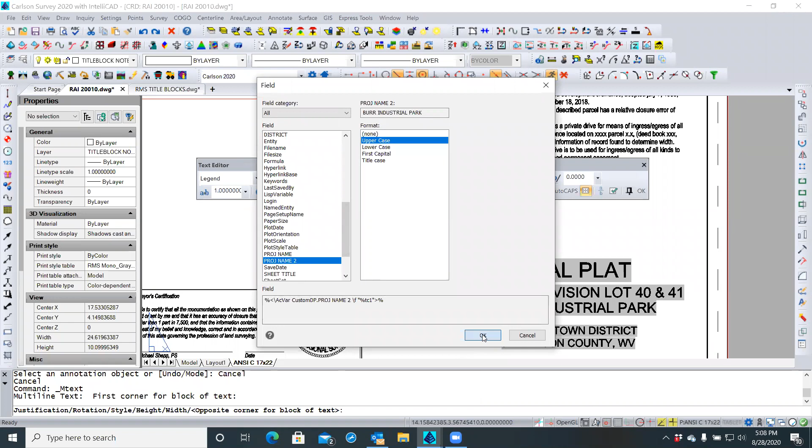So, and then of the, insert field, sorry. So any of these, and that's why I like sheet title, or sheet number, I was going to say located out in my backyard, you know, so whatever, it's just plain text.

And I'll say okay, and you see the ones that are gray, those are the fields, those are the placeholders. And this is a paragraph. I can resize it so that it doesn't, so 40, 41, yeah, there, of the Burr Industrial Park. So I've got a field here, a field here, a field here, and it's all just part of that. These are all individual pieces of text. They don't have to be, that's what I wanted to show you.

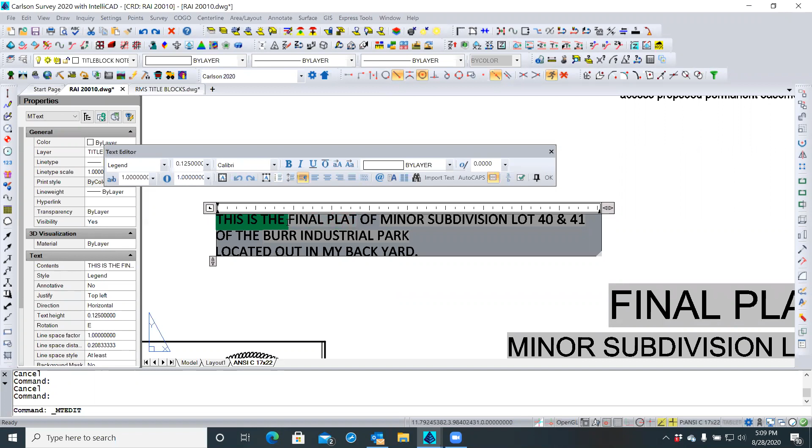They can be like that, and they can also be, you know, the first line of this stuff. Let's say we go up to here, and we hit the enter key. So you're not restricted to making the lines break by dragging the edges. You can do these anywhere they happen to fall. So if you put a purposeful enter key at the end of each of those lines, then it goes like such, and notice they're all lined up on the left.

So if I select that and change its justification from top left to top center, then that's what that looks like. Now you have to imagine when you print it, you're not going to see the gray background. And then these can also, let's say, 0.125 is my text height, but maybe on this one I want that to be 0.08. So like I said, maybe the same thing right there.

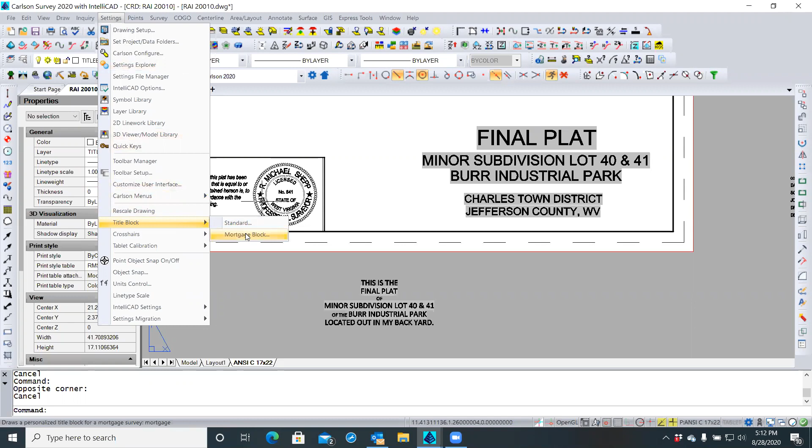See, there's all this title block, standard title block, a mortgage block. So let's say if I do a standard title block, now what they're looking to do - he has this title stuff, which you can draw yourself and store yourself. But what they're saying is that if you use these available title blocks, where do these things come from? Well, they have to be files named very specific names and stored in a very specific location. Then they talk about what scale you want, what paper size you want, but that's if you're plotting out of model space.

We're not doing that. We're much beyond that nowadays. We plot out of paper space, okay, so that we can have multiple sheets out. So in that regard, yes, you were correct, you saw it, but it's an old tool, and it was something very good in the days before CAD systems ever had paper space. It's still there as a legacy tool.

Now also when you're doing this, take a look at this particular line of text. I look at that and I'm going to scroll over here and find the height. Well, that's 0.375 - so that's 3/8 of an inch tall on my sheet. Now that may be much larger than I want to see, or it might be exactly what I want to see. You're just going to have to be the judge of that, or if they govern for you that you have to have it a certain size. In fact, I think they said our minimum text was 0.125, that's our 1/8 of an inch.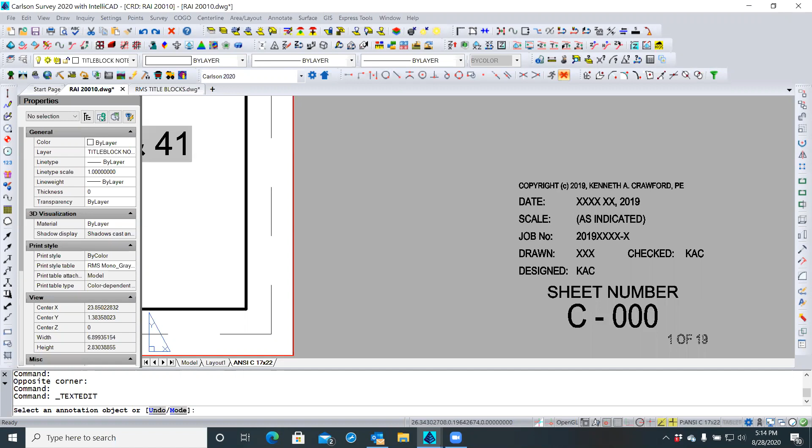I usually have a sheet number, and I have a sheet sequence - that's 1 of 19, which is the total number of sheets. But again, I'm used to having 150, 160 sheets in a construction project. You're going to have 1, sometimes 2 sheets, so you may or may not even need that or have to worry about it. It might be something you're just going to type once and forget, and go on. But that's the kind of stuff we're headed toward.

And if you want this stuff set apart in these little blocks like this, those are just drawn lines - you just draw them and have it fit, and off you go. You're going to check these notes and see if any of them, or all of them, or however many of them are going to apply.

You're going to look at these symbols. And whenever I see stop signs, I like to give a good regen so I get the rounded corners. You're going to think about maybe freezing the point numbers, but not the descriptions. We've got the line weights. We also had, remember, the power pole had those descriptions on those - how do I do that?

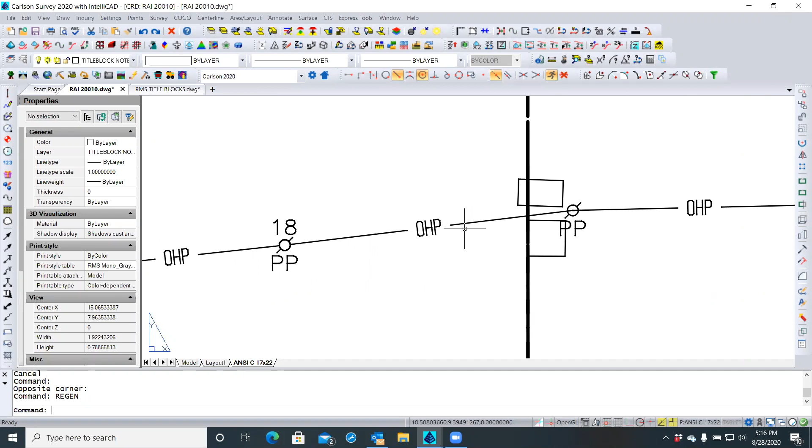You need to do what now? Change the descriptions on those. I just have them called corners - they're going to be either round cap rebar or set cap rebar. Gotcha. Just double click.

Okay, just double click that point. In fact, you see that 303? I think it says found number 5 rebar. Yeah, if you double click that, or go up and double click number 304. There you go, yeah, now you're in the field. So now double click, there you go. Now you're editing the point.

So up at the top, the tabs at the top, you want to choose the general tab. The symbol tab is what we would change it to, that bigger circle with the white wipeout. Okay, and how do I do that? I want to change the symbol. You would either click that button or the button over to the right of the field name that says Set. Okay, and then you're going to want to pull that down at the top and make sure it says Points Wipeout. Now that's where it is. It will probably be normally sitting on Points, but you're going to use Points Wipeout.

Now just switch to the tabs under the general, and now where it says description. Here's two descriptions: one is in the drawing and one is in the coordinate file, and they can be separate and apart from each other. That's what Field to Finish is sort of built around. But you're going to probably want to put that same description in both places. So I would type it here.

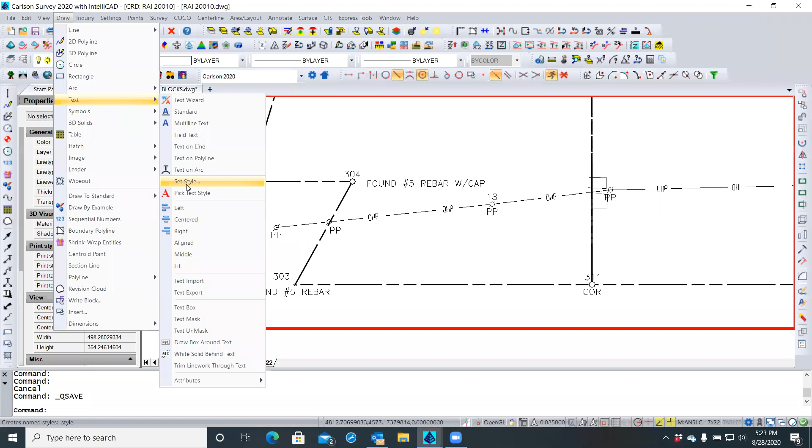Or instead of doing it there, I'll show you what it looks like. So you set style, and now the current style name is legend. We're going to pull that down and scroll till we see PTXT, which is right there, and we choose that. Now there's your IC, which stands for IntelliCAD, Roman S, which stands for Roman simplex.

So if you want that to be, I don't know, Calibri or Arial... Can it be Arial? It can be anything you see in that list there, and Arial is included. I kind of like Arial. Yeah, one thing though is that Arial tends to be a little wide. So if you have those long descriptions like you just typed in, you might want to choose Arial narrow. It's still Arial, but it's just compressed a little bit.

There you go. And then you say okay. Yes, that's fine. So now that takes up a little bit less width than it would otherwise. I think that looks better, don't you? I do, I agree. Now, so that's one place to change that style.

And again, if that's the style you want to use for your points all the time, let's go over here and redefine our style in this drawing. This is our template that we're building, right? Yeah. Remember, we can do that one of two ways: I can go over here and run the command again, or have them both open. I'll choose my icon right here next to that pull down, which is my Drawing Explorer. And I see both files here.

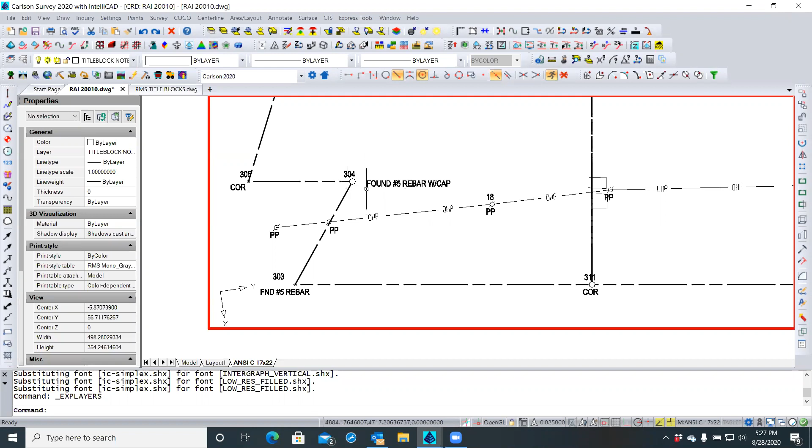I remember I saw some of the plats, and those samples you gave me were round circles, and they look like little daisies—like they have little flower petals in the middle. And I forget, that went into the legend as a... I don't remember what it was. Maybe it was a set rebar, or maybe it was a found rebar with a cap. So you could do that. Instead of having this called out at every corner, you could just include that in your legend.

Yeah, that's a good idea. The only one that would be different is 311 and 302, which are going to be set.

Number 5, okay. All right, so now here is some of the convention that I'm used to seeing in terms of found and set. And it's coming from a slightly different perspective out of the engineering world as opposed to the surveying world. But for us...

Existing things, that's your found rebars. So existings tend to be lighter weight, they tend to not be colored in. Sometimes in terms of text, like with PennDOT, anything existing is italics, text-wise, and anything proposed is in straight up and down text.

Also, drawn-wise, it's heavier line work and a little more emphasized. And sometimes the existing geometry is grayed, lighter as well as skinnier. So any and all of those differentiations.

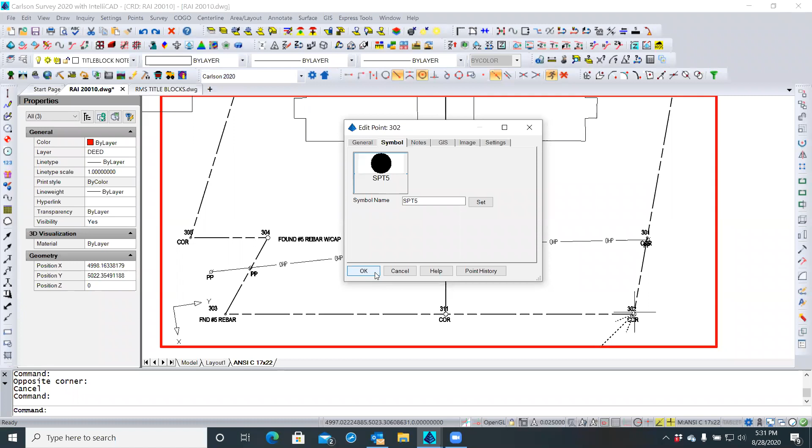Now, if I go back to general, since I'm going to have a legend... Yeah, you have a legend. Yeah, you could, or you could just simply freeze that layer.

I would do what you just said. No, first, for your drawing description, I would just delete it. But for your CRD file description, you might type in 'set rebar,' because remember, that's information for you when you look at your point lists. It doesn't have to be formalized exactly the way you'd see it on the plat, but you want it to be available to you at some point.

Now, the reason I'd say take that description out and make it blank for the drawing description is because, you know, I was telling you that you could just freeze the point descriptions — but that freezes them for every point. There may be another point somewhere that you put in that you want to use the description for, and you're not going to put it in the legend, you're just going to label it. So that's a good move to clear it out.

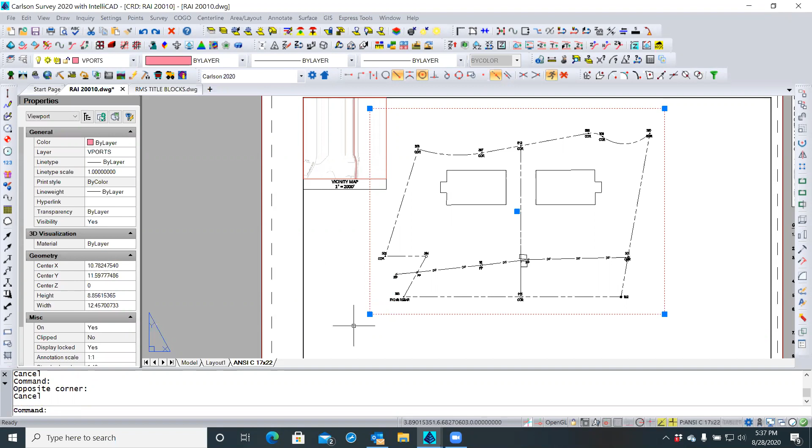Now there's something else too. Sometimes as you're getting these set, and they're not locked to begin with, maybe you double click inside and zoom way in like this. Let's say if it's not locked yet and you're in paper space, when you zoom in and out, you're zooming in and out on the paper.

If you double click in it and zoom in and out, if it is not locked, you're zooming the scale of the drawing that shows in that viewport. But when it is locked, it switches back and forth between paper space and model space to do the zooming. But now here's the trick.

So sometimes you'll forget that a viewport is unlocked and you'll change it. But if you're ever in—and this is another issue—let's say I've zoomed in while I'm in paper space, so I'm getting this ready. And let's say, oh, I zoom in here and I get it. Okay, now I want to see, I don't want to know where I am.

So if I double click now, you see that red frame that tells me I'm inside the viewport and I can do whatever I want to do or need to do. And if I want to go back out, well, I can't get the mouse outside of there to double click it like I've been having you do outside the viewport. So here's the super secret handshake: as you look down here at this status line, where it says M:ANSI C...

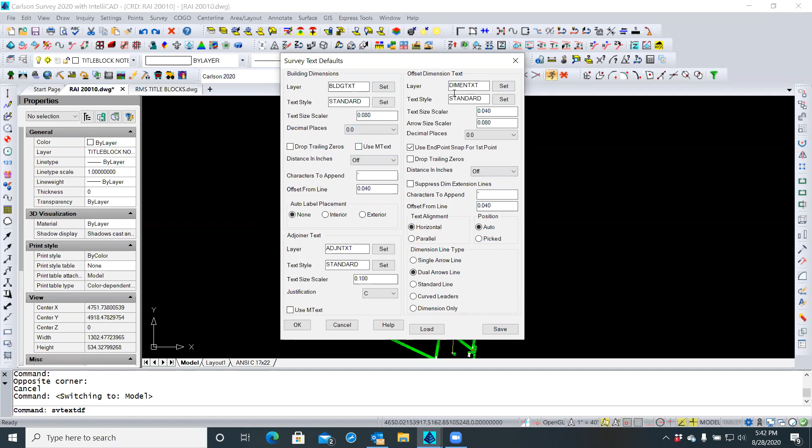And there's also what's called survey text, which these building dimensions, for instance, would type the text. And you got the survey text defaults, and that's things like what layer they go on, what style, what size. And your building dimensions, here's your offset dimensions, those are the perpendicular pulls to the property line. And then the adjoiners, and what layer and stuff they go on.

All right, so now go ahead, I'm gonna let you draw the north arrow, but keep in mind, and this is real easy to forget, I do this all the time, even today, I've done this for 40 years - I'll get in a hurry to finish something, and I don't take the time to think about what layer I'm on. I just start slapping stuff in there, and then later I get frustrated because I have to go back and change it. So get in the habit of, if you need a new layer, make one, or switch to be on that different layer. So I'm going to look for a layer that says north or arrow or something like that. I don't really see one, so maybe I'd just call it north arrow or N arrow or something. So a new layer. Yes, correct.

Yeah, I'd give it a color if you want, anything like that. I would give it also a line weight - see where it says default. Right there, you pull it down. Just be aware of whatever north arrows you may use, and if they're too heavy, you may need to change the line weight and stuff. But default's fine to try for now.

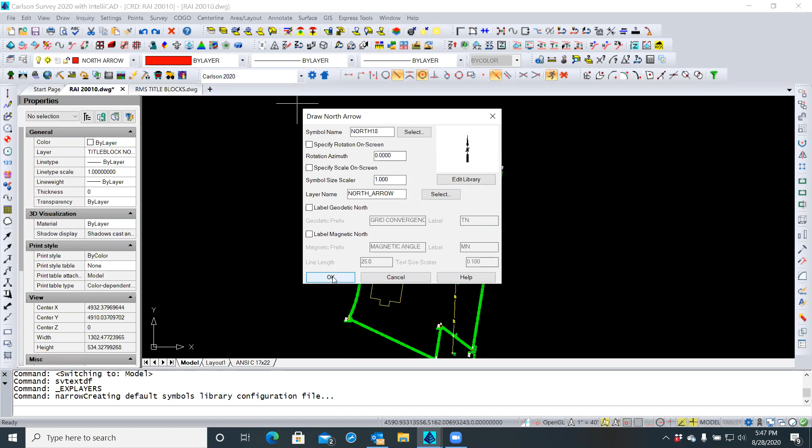Now, are you going to have a double north arrow, showing both norths? No, I don't think so, because you're also going to say in your notes that the basis of bearing is such and such. So you may not need to worry about labeling either geodetic or magnetic north, and you just draw a piece of text up beside it.

And it wants an insertion point. Now here's the trick: just click maybe inside that building, something you know is going to be seen in your drawing sheet. So right there. All right, now that is the relative size it's going to be, which might be a little small, I'm not sure, but here's how we fix all that.

We're going to go back to the paper space, click, and there you see that would be the size of your north arrow, but it lives in model space. So let's double click inside that model space, and let's select that arrow, or you could type the command first. You may have to type the command first, I'm not sure. But anyway, if we select that arrow, we're going to issue a command called CHSPACE, change space.

That means I'm going to change space from model to paper or paper to model. Return, enter. So enter, it says set the target viewport active and press enter to continue. So the target is our paper space, so double click outside of that. And now hit enter. Did that work? My goodness.

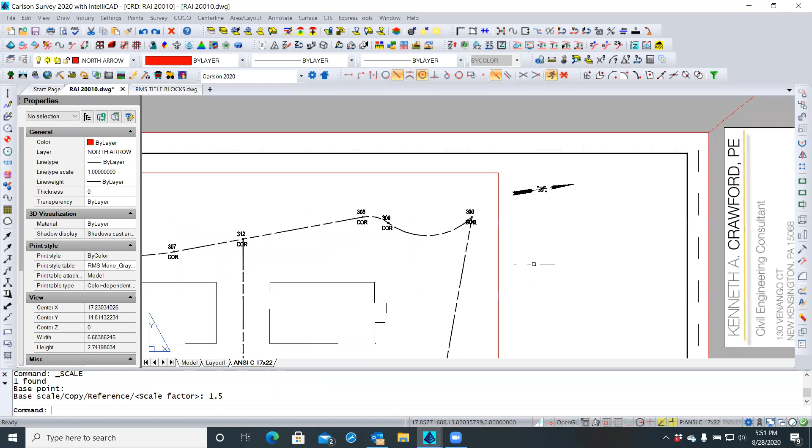I can also look at it and see that if I do a distance, say from here to here, it tells me it's basically an inch long. Well, is that long enough? Or do I want it to be an inch and a half? In which case you could maybe change its scale from 1 to 1.5, so my scale factor would be 1.5. So now that's about an inch and a half. And I can just move that around where we need to go.

Okay, so same thing with the drawing scale. If you double click inside it so that you're inside model space, or if you do this out in the model tab, then you're going to... all right, so we have a north arrow.

Let's make another layer. I'm going to let you do this, so go create yourself a new layer. There you go, and let's call it bar scale. And might as well make it current while you're at it. And you don't need to worry about the color, you can just leave it white.

Because you're not going to see the color in paper space unless we use whatever the style table says. Model space or in paper space? Yeah, well, we're in model space right now. We're in the model, but we are looking at it from the paper space layout. So that's why everything looks black. But if we go back to model space, we have green lines and yellow lines and all that. So none of that really matters.

But you can do it from either place. I'm just saying, be aware: if you try to change a color there, here's the only place you're going to see it, because it's my page setup that's controlling what that color looks like.

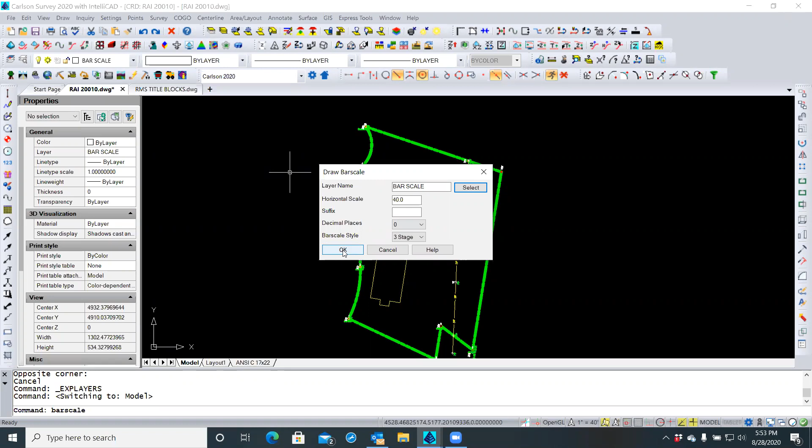No, there it is. No, your layer name, make sure - was that what you called it? I think maybe you have a space in yours. So hit that select button and make sure you choose the one that you... there it is. Yeah, okay, say okay. I think that other one is either a default or it was the last thing you had. And now, at this point, you're going to put in whatever scale that is over there in their drawing.

Now again, keep it inside the property so you can see it. We're going to do that change space bit again. Put it in there, you mean? Yeah. Okay, now go back to your paper space. Well, except I would go to the ANSI C one.

Okay, now you're going to type CH space again. Okay, you're going to select the bar scale. Enter and enter. Now set the target viewport, so click outside of it once and hit enter. What happened? All right, you're through selecting, so click and or hit enter. Now click outside of that once with the left mouse button.

Still not, what's going on here? Let me see. All right, change space. Oops. I select this guy. Set the target viewport, click. Must not have been what I did.

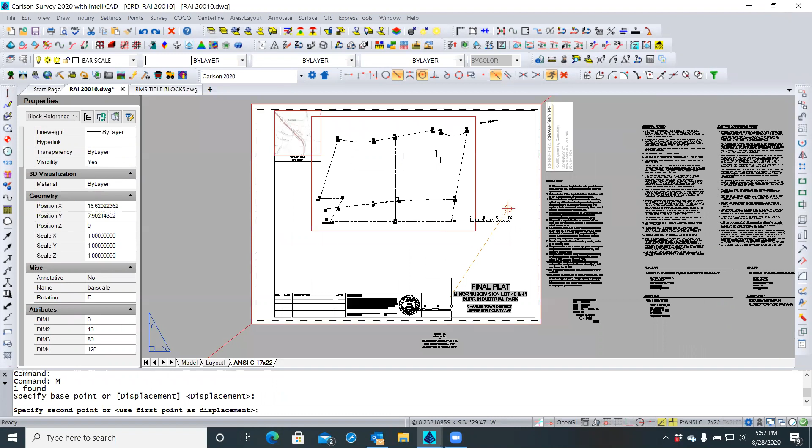So now it's a very simple matter of - well, here's a block, the block reference, see up here, and it's called bar scale, is the name of it, and it is at a rotation. Now that I'm in paper space, I see that rotation is south 85.7 something E. So I just select it, I go to that field, and I just type E. And now it's all rotated around right, and I can move it and put it wherever it needs to go, either here, or maybe you've got it down here, wherever and however you want it to be.

The reason I like to say scale in feet is I've seen too many lawsuits where some people insist on doing this. They insist on saying 1 inch equals 40 feet. But what happens if this is ever just slightly reduced or slightly enlarged on reproduction?

Somebody pulls out a scale and starts measuring the map, and it's not 1 inch equals 40 feet anymore. It might be 0.965 inches equals a foot. I've seen, especially in old mine mapping areas, where things were drawn at half scale, or drawn at some arbitrary reduction to fit on a microfiche card. So they plotted those maps and whip out their scale.

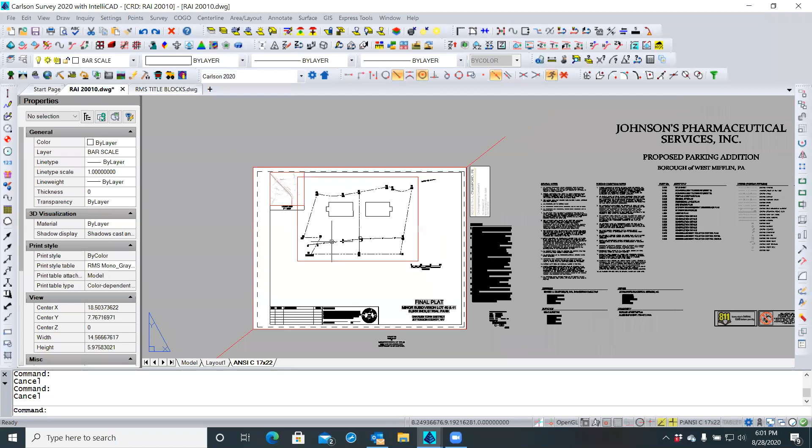Same thing for your power poles. You may or may not want it to say something, so I'll take off the power pole description too. Yeah, I think we've got something similar to that already. I think I called it an existing overhead utility, and it was just lines there, and I think I had the poles.

Okay, so that's what we'll do. It can either be two symbols in the legend, one for the pole, one for the line, or you can combine the two, much like we do for this. I don't call this a fence post or anything. So anyway, we're getting there. I think you can see where we're headed and why and how.

Okay, when do you think our next session can be? Well, I would rather it be sooner than later. I don't want to keep pushing this every week. I really need to get this plat out pretty soon.

Why don't you work on this over the weekend and let's get back together either Monday. Let me double check what I've got going on Monday. I think I'm good. Yeah, let's just plan a session for Monday, maybe if you think you're going to get it ready.